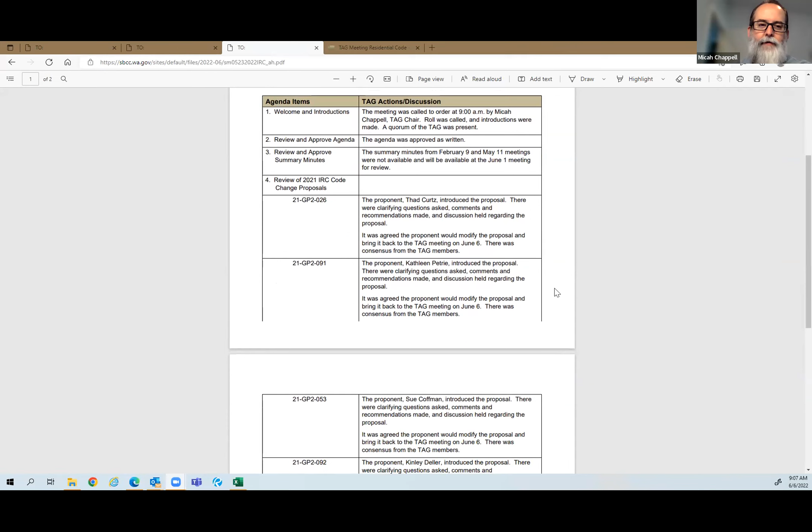You know, if we could get the minutes before the meeting, it would be great. I'm generally uncomfortable approving something that I haven't read. We are really struggling with the minutes because we have meetings back to back, a few meetings per day, so be patient with us. Understood, it's just, maybe we catch them up the next meeting, or I don't know if we actually have a next meeting, but I understand. That makes sense. Maybe we could also look at sending out the recordings sooner, although they're not summary minutes, but at least it would have the information available. We are able to post the recordings faster, but the minutes take time because it's only Annette, and she can't keep up with all these meetings that are in a row.

Understandable, all right, so noted, thank you for the discussion, Annie. Will these minutes actually be posted online soon? Yes, once they're approved, I posted them this morning. I just got them finished, I apologize for that, so they are on today's meeting. If you go to our website and look, and then once they're approved, I will have them posted for the meetings they pertain to. Thank you.

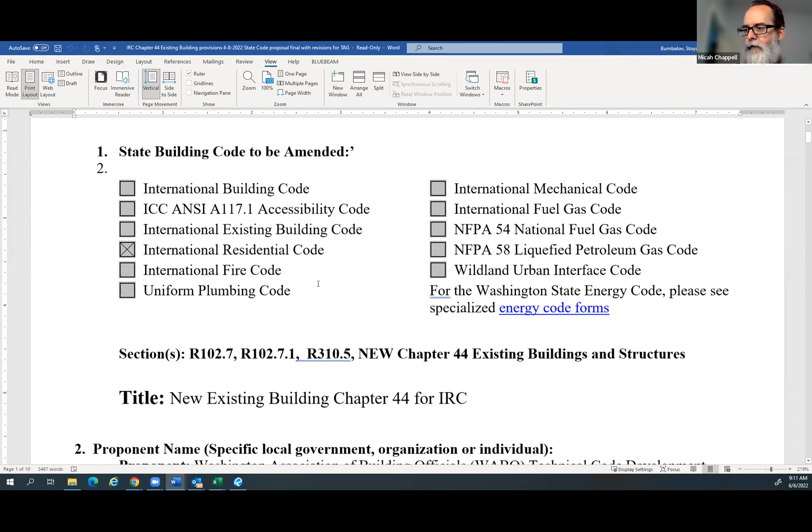Here is the proposal. Stoyan, is this the one that I emailed you this morning? This is the one that you emailed me this morning. Yes, okay great.

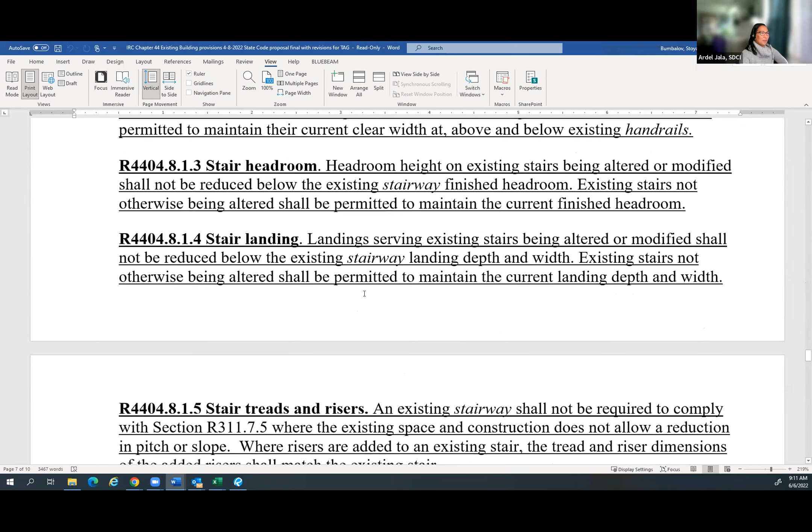Do you have the modified areas highlighted or track changes, something? I did not. I tried to get a clean version to you, but I have them highlighted on my screen. I don't know if it's okay for me to do a screen share. Okay, yeah, I think that Ardel could probably easily do that.

We did discuss most of the proposal from last week, and so this is really just cleanup of a few items, just some clarifications. So Ardel has a version that she was able to get done yesterday. Thanks for swapping this out.

Hi again, my name's Ardel Jala with SDCI, and Sue's presented the overall proposal previously. As I go through these changes, feel free to stop me and let me know when you want to dig into a section further. They are primarily editorial.

There are a couple of technical changes, but as you may know, these are currently also being discussed for the 2024 national code change proposals. And so what we've done is taken some of the committee action hearing results and incorporated them into our state proposal where we felt it was appropriate.

And so that's what you'll see here today is one of the fairly significant structural proposals that got into the 2024 code change proposal that WABO also has a version of and will be taking to national at the public comment hearings. So here we have, can everybody see this screen?

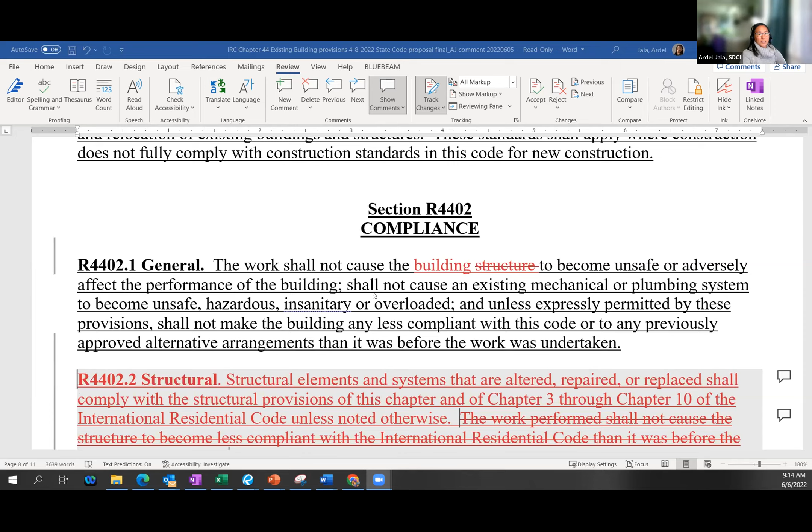As we keep going further, slight change to reference a building instead of a structure, as that has become consistent language throughout IRC. This is the structural changes that were approved in RB 297 at the committee action hearings. And this is more specific language within existing buildings that will carry throughout all of the sections that are scoped in chapter 44. Compliance section is the first one.

And so this is where we talk about more general requirements. And it says to comply with the provisions of this chapter and of chapter 3 through 10 of the IRC unless noted otherwise. So again, chapter 44 is the break to full code compliance.

This is minimum design loads. This clarifies that the structure shall be designed for the loads applicable at the time the building was constructed, and then within each scoping—alterations, repairs, or additions—that gets further clarified. So that's the unless noted otherwise. And again, a reference back to 102.7.1, which when you uncover work, structural components that are unsafe shall be repaired.

This next one is one that might want discussion. 4402.2.3 is unreinforced masonry parapet bracing, which is language out of the model code change proposal that requires unreinforced masonry buildings in the IRC that are in seismic design category D or E to get their parapets braced and wall anchors installed at the roof line whenever a re-roofing permit is issued. How that would be enforced across jurisdictions may vary, because re-roofing permit requirements do vary across jurisdictions. It also requires that parapet bracing and wall anchors be of an approved design, which could reference both an engineered design or a prescriptive design, depending on the rules in place at a jurisdiction.

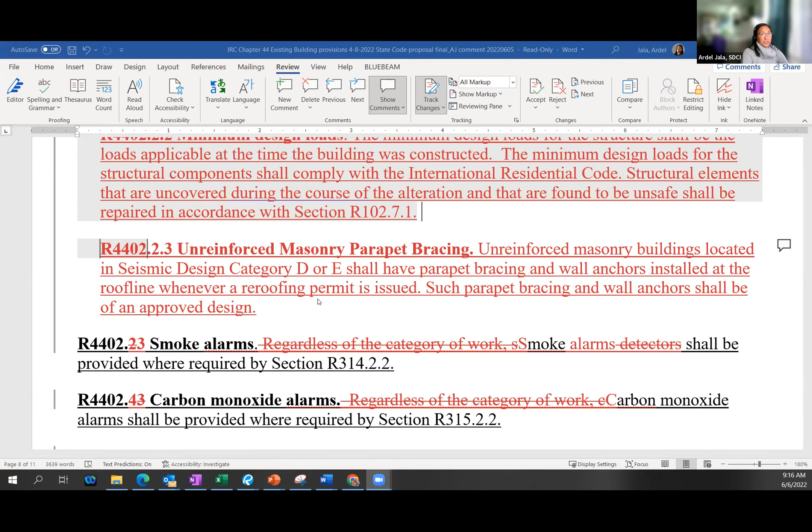Going further through, just some cleanup of language on regardless of the category work. That's unnecessary language, so we took that out of these two sections here. There's some renumbering going on because of the addition of the structural section.

4402.7 is features exceeding code requirements, and you can always go above and beyond code, so this just seemed like an unnecessary section. So we've stricken that.

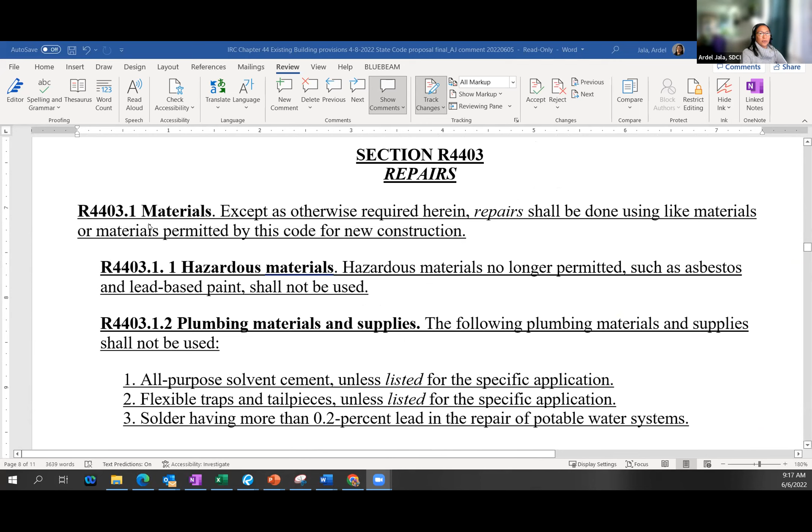Again, a reference to structural was added to each of these scoping sections. So right now, if you're in 4403, the scoping goes in order of repairs, and so you'll see that first here in repairs. The next section is alterations.

Again, this particular change is an editorial comment. Alterations shall not cause the existing building to become less compliant than it was prior to this work being completed. And then this language is stricken because it's already part of R102.7.1. So there's no need to duplicate it here, because if you duplicate it here, then you should duplicate it in all the sections.

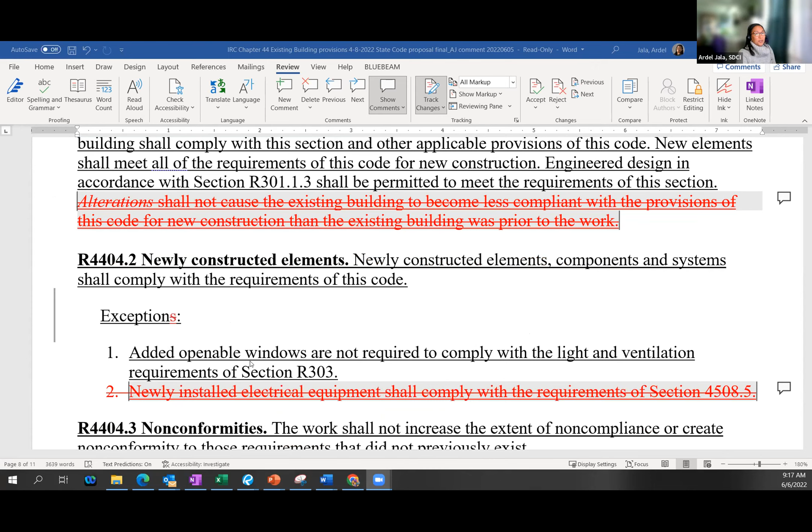And so it didn't make sense under one of the subsections. Newly constructed elements shall meet new code. Again, we are in the alteration section, so if you're building new, meet new. And the exceptions are—this was in the version last time.

What we've stricken is: newly installed electrical equipment shall comply with the requirements of section 4508.5. And Sue, correct me here, was this just a leftover from a reference in your version of it? Yeah, and you're right, we don't need to restate this. We already say in the charging that new means new, so it doesn't need to be restated. Thanks.

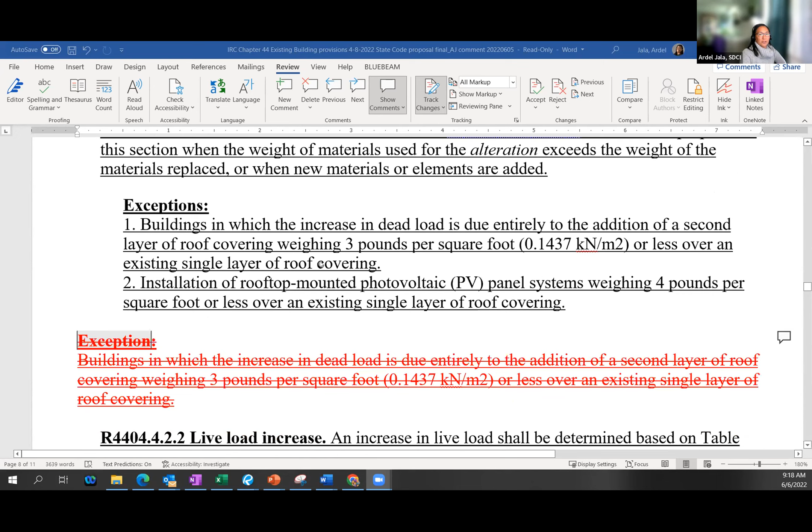4404.4, again we're in the alteration section, so we're repeating the structural reference language here. These sections that follow, there's no change here from what the version you last saw. This is a cleanup—here we had exceptions 1 and 2. This was a repeat of language of exception 1, so we didn't need that section. This is just cleanup here.

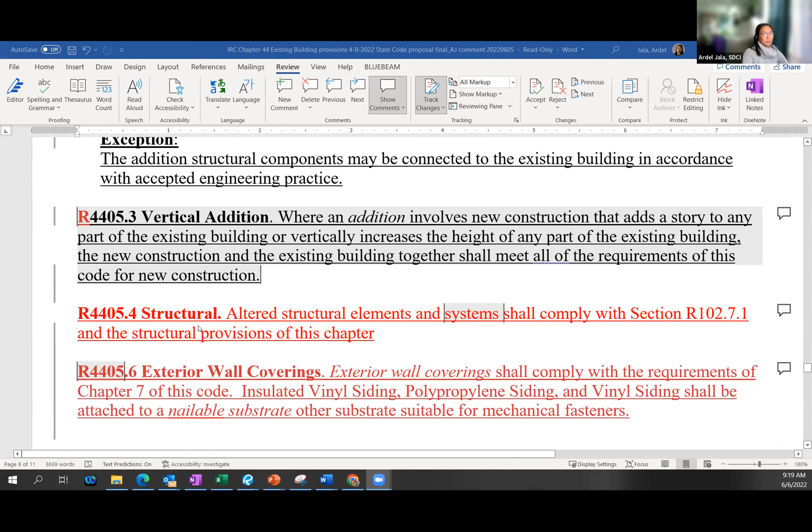As we continue going through, there's no changes to the version you last saw, until we get into the addition section, which again we add the reference for structural. This is a newer one, 4405.6. This is also something that was approved at the committee action hearings, and so again, in an effort to align with what's being approved at the national level, we've pulled this section into the additions, and it's a reference to exterior wall coverings per chapter 7.

Sorry, there is a slight area, this needs to say 'or.' So that's an add versus the version that you've had, and I'll clean that up and send that back to you, Stoyan. It's: insulated vinyl siding, polypropylene siding, and vinyl siding shall be attached to a nailable substrate or other substrate suitable for mechanical fasteners. And what is a nailable substrate? That is a term that got pulled into the 21 code, so that is a defined term.

Relocations. This is a sentence that compliance with the requirements of this chapter is required if the moved buildings or structures undergo substantial alterations as defined in R107.9.1—that is a reference that doesn't exist in the state code, and so we've stricken it here. And it just goes back to the model code language, which is that if you relocate a building within the jurisdiction and you're not changing the use or classification, then you just get to move it. But the foundation needs to comply with the requirements of new construction.

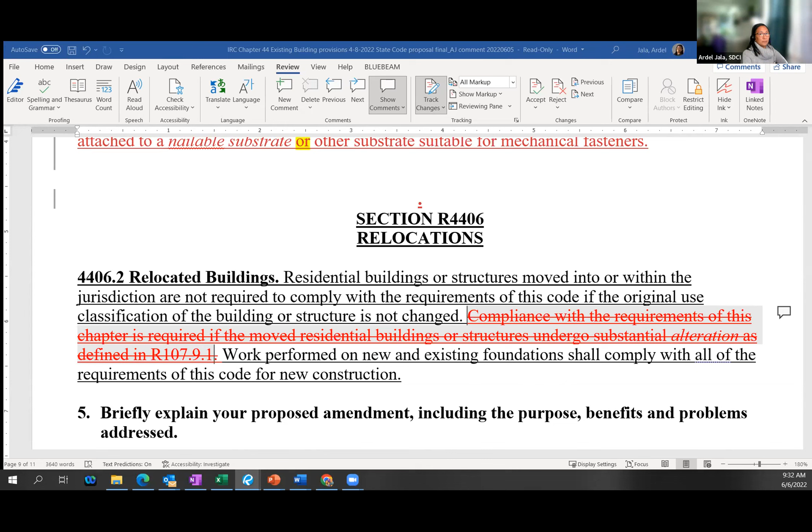Any additional questions or comments? Okay. So today we will need to take some votes on the tag recommendation for these. Am I correct in saying that, Stoyan, before I jump the gun on anything? Yes, sir. Okay, fabulous.

So as you've been shown and discussed, the 053 proposal for a new chapter 44 has been revised, and I want to get a motion from the tag on whether or not we would recommend moving this forward to the BFP committee as an approved or disapproved proposal. So I will open the floor to tag members for a motion, please.

It's Damon Doyle, I move approval. Okay, we have a motion. Do we have a second? I'll second it, and I think we just need to clarify revised and amended. Okay, thank you for that clarification.

Stoyan, how do you want that motion to be noted, that we are approving for recommendation the revised proposal? Do you see the spreadsheet? Yes. Okay, so here is 53. We have the initial proposal, we have the revision, and I need to update the revision because I wasn't aware of the new revision. So I will replace this, and here we will have the recommendation for the council and the BFP committee: approve as modified.

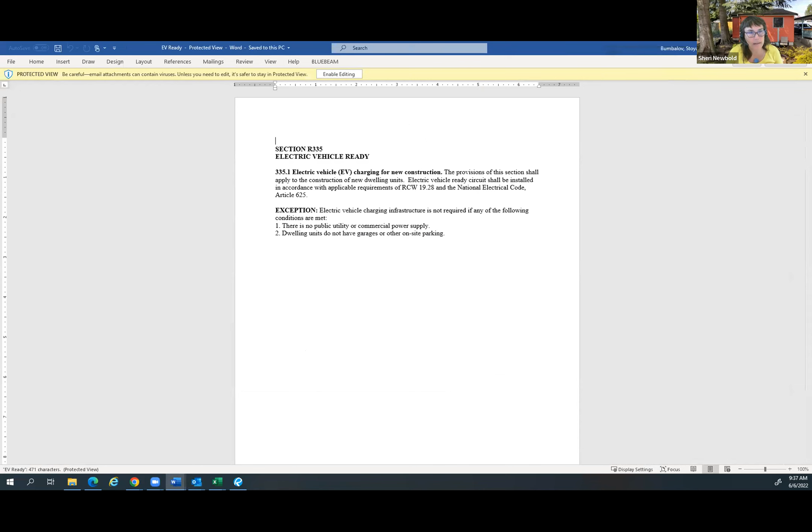And I've added a couple of sections into it to clarify some of the questions that were asked. One of the things that I've shifted in here is there was a request for this to really have seismic provisions under IBC, and so I've clarified that in the R301.

Sorry, point. Oh, that's okay. Where do you want— just me going down to this very next one, you're right there. I've just clarified that this would refer to seismic provisions in the IBC. I think there was a concern about that instead of it being prescriptive last time.

And then I think the very next thing to talk about is that one of the things I think that's important about this proposal is that it's proposing that we have these smaller scale multifamily units that then have a prescriptive way of treating fire resistance. They have a prescriptive way of protecting the exit and establishing what the width of the exit is and how many exit discharges, et cetera. And so those are some of the questions that came up last time.

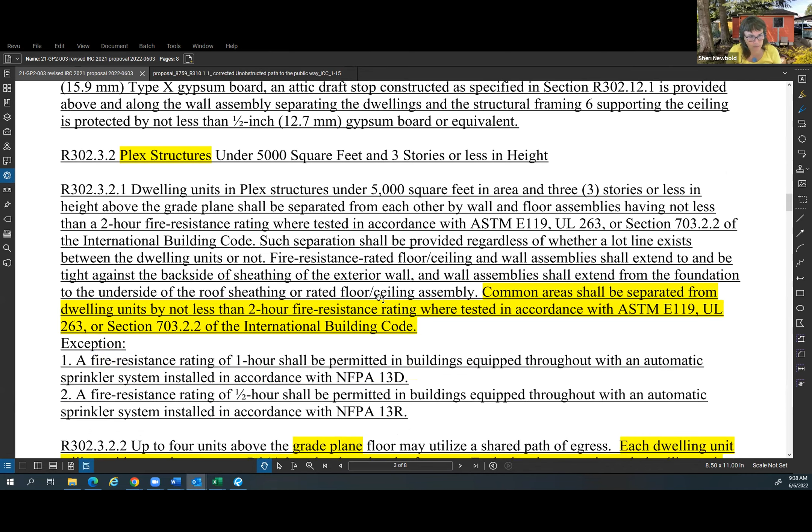And then what I'm proposing, if you scroll down just a little bit more, Stoyan, under the R302.3 — and I realized that at some point in time this would all get renumbered and utilize the actual state code instead of the model code — but essentially that's what I've put here, is I've clarified grade plane, and

separating any kind of common area or path of egress with a 2-hour resistance. I've also specified that each dwelling unit would have an exit access to the shared path of egress, and that each sleeping room within the dwelling unit would have an emergency escape and rescue opening per 310. And that the path of egress would be protected by a 2-hour fire resistance rating, and specified a prescriptive width for the path of egress if they're in this under 5,000 square foot building. It would have a prescriptive width of 42 inches minimum, and otherwise meet R311, and then have 2 exit discharges to the public way.

And then I've reduced potentially that prescriptive width for the path of egress if there's a sprinkler system. So that's what I've done for the up to 5,000, and I've done something similar in scale for the up to 8,000 structure.

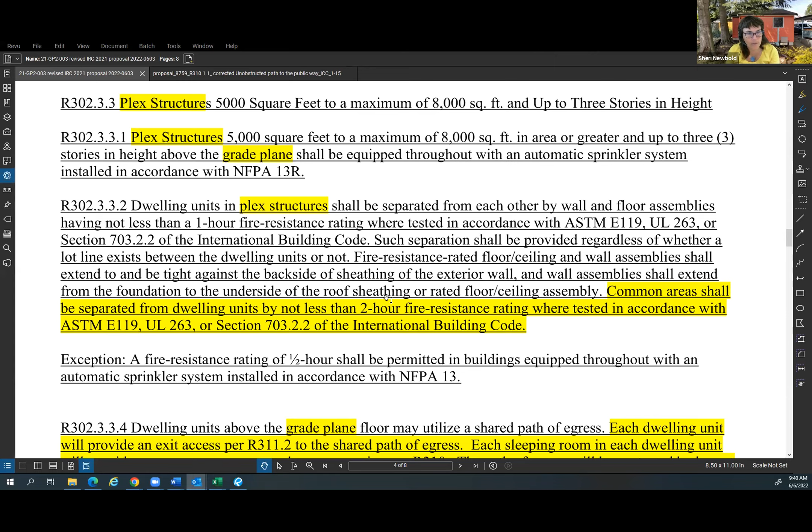The other thing that was brought up last time was interconnection for the smoke alarms. Because all of this is duplicating, we could scroll down to R314, where I've called for interconnection of the required smoke alarms, so that any actuation would affect smoke alarms either in a path of egress or common area and all the dwelling units. So anything triggered in one section of the building would trigger it in all parts of the building.

And then last time there was a concern about accessibility, and R320 currently refers certain projects being permitted under IRC to the building code for accessibility. So I've essentially changed that here to 3 or more dwelling units instead of 4 or more dwelling units, in order to accommodate accessibility. And of course, fair housing would be triggered at any rate as well.

And so that's really the sum of the changes that I've made.

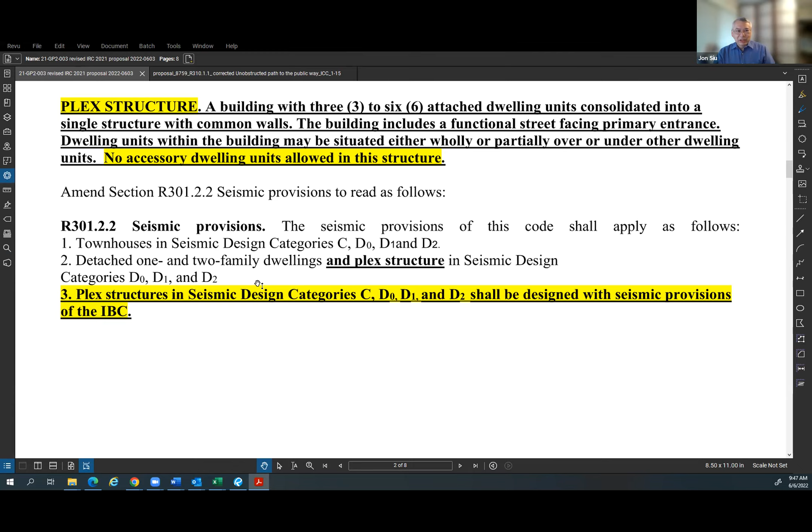I really think that's a really bad idea when you don't have control of your own space. Someone's burned toast is gonna get everybody, so I think that's kind of a problem. But also I would ask the question I don't know the answer to: whether that would violate the listings where interconnected smokes are allowed in multiple dwelling units, or in common spaces. They may not fit the listing.

So that one I don't know. But the other thing I'll say is I've talked to some people from the Midwest, in Shelby County in particular, and they weren't too happy with that when it went through. What I last heard, and maybe something you need to look at, is the state fire marshal put it on hold because they were not involved in the process, and they were surprised when it went through. So I believe it's being held at the state level right now. I haven't heard what's happened since then.

So I guess those are my comments on this. I really think this should be in the IBC, not in the IRC. So that's my opinion.

Thanks, Jon. Other folks like to talk on this or discuss this proposal? Ken, go ahead.

I was really thinking other people were going to talk, so I was trying to be nice and just wait. So Sheri, I got a question for you. When do you envision these structures to have attached garages?

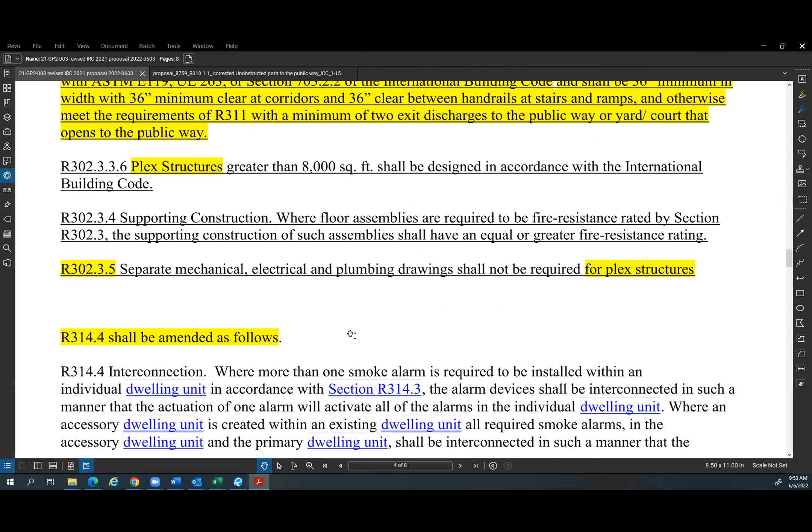Okay, great. The other question I had is in 301.2.2, where it talks about the seismic provisions — we need to include seismic design category E as well. Okay.

I'm a little reticent to having regular references to the IBC, where we talk about going to the IBC to find out what your fire ratings look like.

Which portion are you referring to? 302.3.2.1 - the new language you added there. You just say go see the IBC for that information. I think the goal with the IRC was that it be a standalone document, so you could get what you needed without constantly running back to the IBC.

Can I jump in here? Some of that language, although underlined, is current language in the IRC, Annie - brought over without change, just maybe renumbered. However, there are several references in 302 that send you back to the testing requirements in the IBC, and it also sends you to the IBC currently in R320 for accessibility.

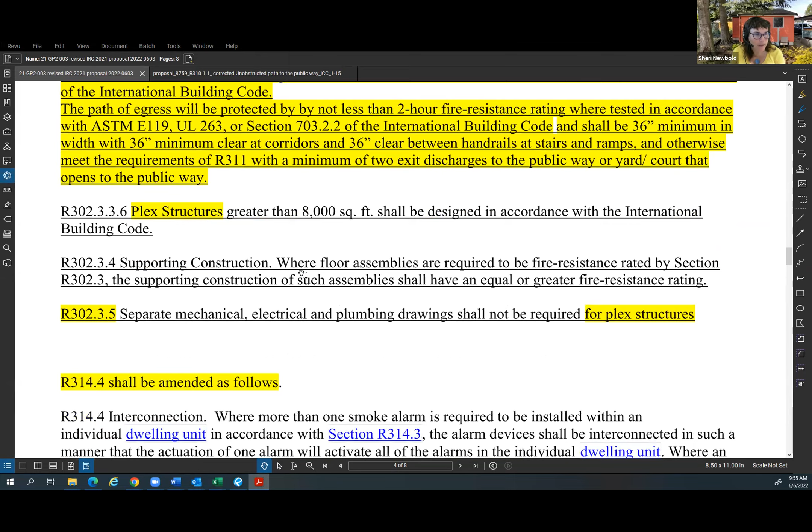Do the ADA requirements start at 4 units or 3 units? I noticed you shoved it from 4 to 3. From a fair housing and ADA requirement, it was 4 or more. It is 4 or more, but what I was suggesting is that since this proposal is for 3 to 6 units, it would start at 3 essentially. But I think consistency with the federal law is probably the best approach.

I appreciate the fact that you put separation between the common areas and the units. I was having real heartburn over those omissions in the first go round. That's everything for me, thanks.

Thank you, Annie. All right, taking them in order that I see the hands up, and that would be John. Yeah, so Annie and Sheri, about the seismic design category E.

I want to be careful with that one. I don't know how you want to do this, but the code already requires that anything in seismic design category E has to go to the IBC, period. So that's probably why it's not addressed in there. This came up in another proposal, and Andy, you'd asked about that before. You don't want to start adding SDCE into all of these because those are supposed to go directly to the IBC - look at 301.2.2 in the base code. Just wanted to throw that in.

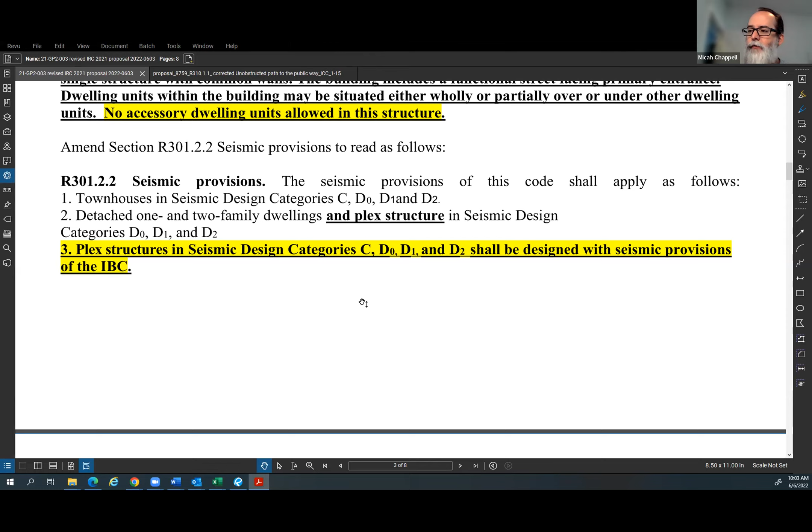So I'll jump in and share a few of my concerns. I still have concerns with the definition. It's talking about, I don't know, it's just going way beyond what I think it should. You do have in there mentioning the building includes a functional street facing primary entrance. Is that an entrance to the corridor or an entrance to units? I'm just not sure what you're meaning there. And speaking of corridors, that is a term that is not used in the IRC. However, you are using it similar to the IBC, but you're not carrying over the definition from the IBC. So I do have some concerns there. How are you using corridors?

I do understand what you're trying to get at with the common path of egress, but again, it's not called common path of egress here. You're calling it a shared path of egress, which also, how is that defined and what would that look like? You're indicating that these dwelling units need to be separated from the common areas by 2 hours. Would that mean that the path of egress has to have a 2-hour separation from each unit as well? I'm not real clear on that. I think that's what you were going for, but that's not explicit in here, in my opinion, of course.

And then I'm just going to kind of parrot—I won't parrot, I'll do the Me Too wave. What we mean by a Me Too wave, for those that don't attend the national hearing, instead of repeating testimony from a bunch of folks in the room, they just give a big, nice, happy wave. As a Me Too, I say the same thing. So that's what the Me Too wave is for there, so if you hear that term, that's what that means. So I'll give a similar Me Too wave on several other items in here. And then I'll still allow for additional discussion if there's anyone else, and if not, I will open the floor.

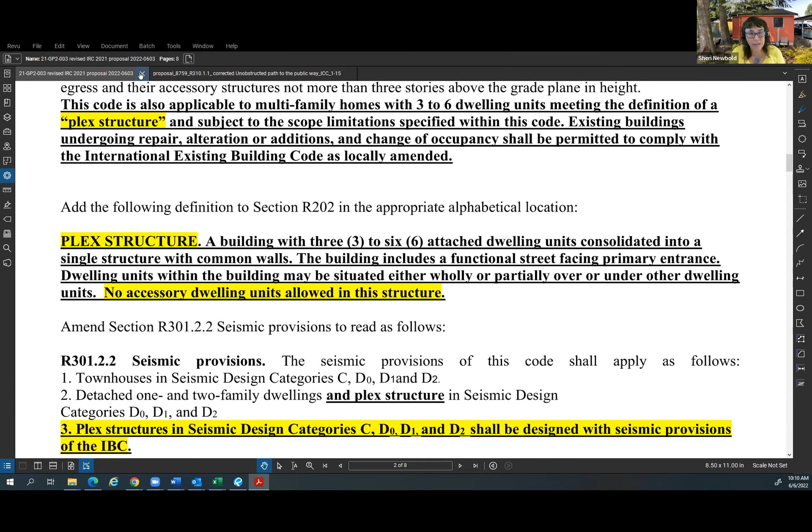And it sounded like Thad and Ardell would be open to it as well, from what I heard them say. So okay, well, I really appreciate everybody's time and energy. So thank you. Thank you, Sheri, we appreciate your time and effort on this.

All right, moving on. Is there anyone else on the call that needed to have a proposal moved up a little earlier? In case they've got something else going on, I want to make sure I provide that opportunity to everyone that is on.

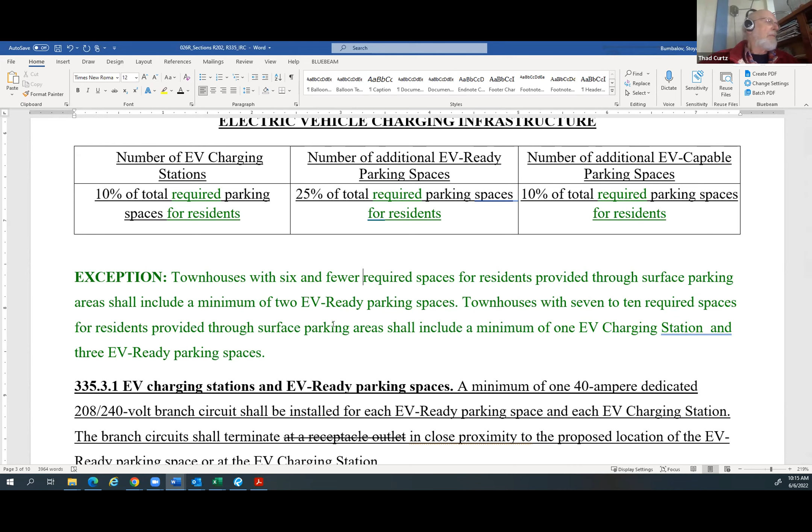So, that's it really. I mean, my basic goals are pretty simple. If new residences have private parking, we ought to be making it easier for the people living in them to add charging for an EV when they get one. The requirements for townhouses with surface parking ought to parallel the ones that the council's already moving forward for apartments built under the IBC. I don't know whether you'd like me to walk through all of the details in the way that Ardell did, or whether you're clear enough about the whole thing so that we can just talk about particular items. But whichever you'd like to do is okay with me.

You're actually the proponent, so if you wanted to go through each change and explain that, that would be fine. But if the tag feels that you've covered that and they've had a chance to review it and see your items in green, then we can just discuss those items as tagged. So I just don't know how much time people have had to look at it in detail, and whether it would be helpful for us to go through it a screen at a time, or whether people just have a certain number of questions they want to ask.

All right, hearing nothing, we may as well just kind of go through it by steps, I guess, just in case there's anything that people might miss otherwise. So Diane, if you could go back to the top, let's see.

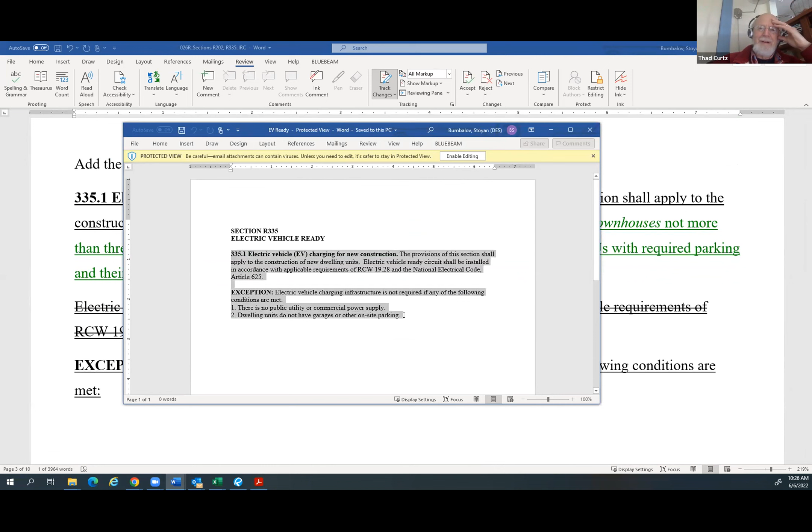Can we go back and look at it again then? I thought our previous conversation was...

Damon, maybe I'm not reading your proposal as I should be, so help me with this. What I'm seeing is the charging paragraph says it'll apply to the construction of all new dwelling units, and an EV-ready circuit shall be installed. That is correct, and so that's it. I guess I'm not seeing a link between the number of EV-ready circuits and the number of dwelling units in that particular project.

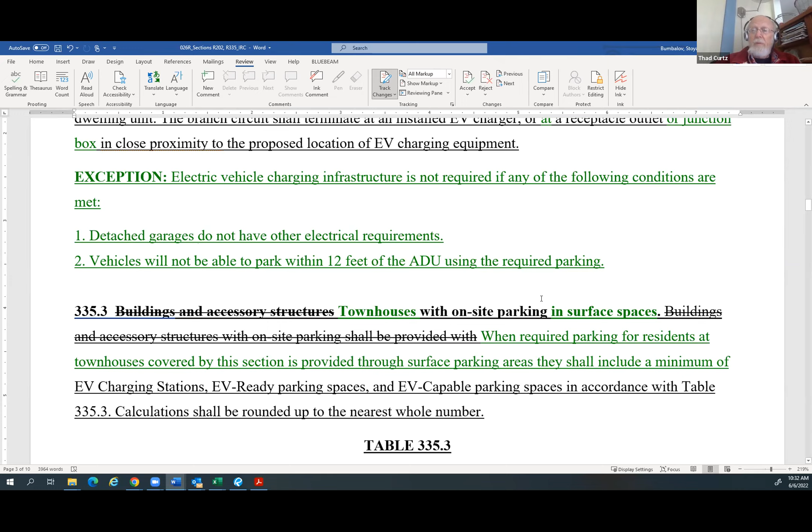The rest of it is about trying to provide for charging in townhouses that do not have garages. And it basically tries to do this in a way that's consistent with the requirements for apartments, more or less like that built under the IBC rather than under the IRC.

It's got the same table that the IBC does, except that if you use the IBC's table for buildings like this that have got a small number of spaces, it seemed to me as if you ended up with more requirements for spaces than really was necessary.

So I've put in something which just specifies numbers for townhouses with 10 spaces or less, rather than applying the table to them.

If you apply the table to some apartment that's got 5 townhouse apartments in it, you end up having to have 4 spaces that have got infrastructure because you're rounding up. So there's 1 EV charging station, there are 2 EV ready spaces, there's another EV capable space. And that seemed like a lot to me for a 5 apartment townhouse. So I've tried to do something that will make it easier to think about that and not require quite as much in that exception.

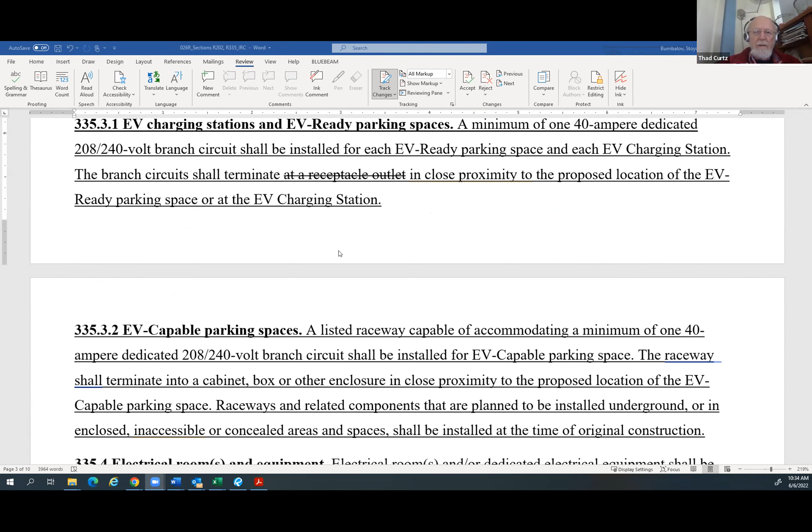Again, the conversation last time made me think that this thing about 335.4 was unnecessary. I've added a little illustrative comment to the exception about load management systems to try to make it clearer about exactly what we're talking about there. That you could put in a circuit with a 60 amp breaker, and it would deliver 48 amps of continuous load. So you could serve 3 spaces with a minimum 16 amp requirement from one circuit like that if you had sharing software. And again, people seem to agree that the accessibility issues were already covered by other places in the IRC, so I took that out.

That's the tour. All right, thank you, Thad.

Okay, with that, I am going to ask Dorian to scroll back up to the beginning, or Annette, whoever's controlling that, up to the beginning of the proposal, and we're going to open it to the floor for discussion on the proposed changes or the proposal overall.

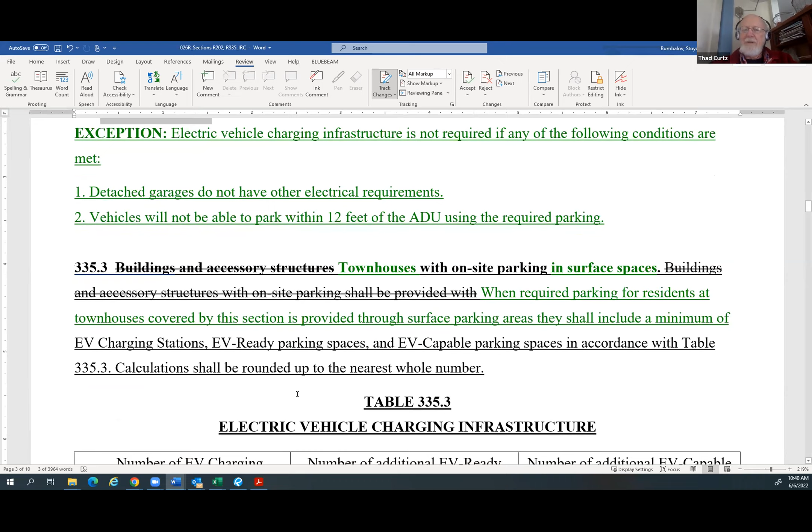Maybe, I don't know whether it's appropriate. Maybe we could proceed by stages, Micah. If we entertained a proposal to cut the ADU language and replace it with an exemption for ADUs, that would be one step. We could entertain a proposal to remove my particular exemption for townhouses with no garages and 10 spaces or less, and replace it with the exemption that's currently in the IBC, just exempting anything that's got 10 spaces or less from the requirement there. And then we could entertain a proposal for just basically doing what Damon would like to do, striking the rest of it, and see what people think about the different pieces of it.

Okay, Thad, that's a good suggestion. However, based on our time and schedule, I don't believe we're going to have enough time to sit here and rebuild the proposal to the entire tag's liking. I know there are a lot of holes in it that folks have concern with. I'll share some of mine. Again, you have done a phenomenal amount of work in a short amount of time to make some modifications. However, I still don't believe it's enough. I do believe if we start at the definitions, these are similar definitions to the proposal that was before for the IBC. However, I believe we got rid of electric vehicle as a definition, and then electric vehicle charging station, since it is still an electric vehicle supply equipment. They were very similar, so we cut down on some of the definitions.

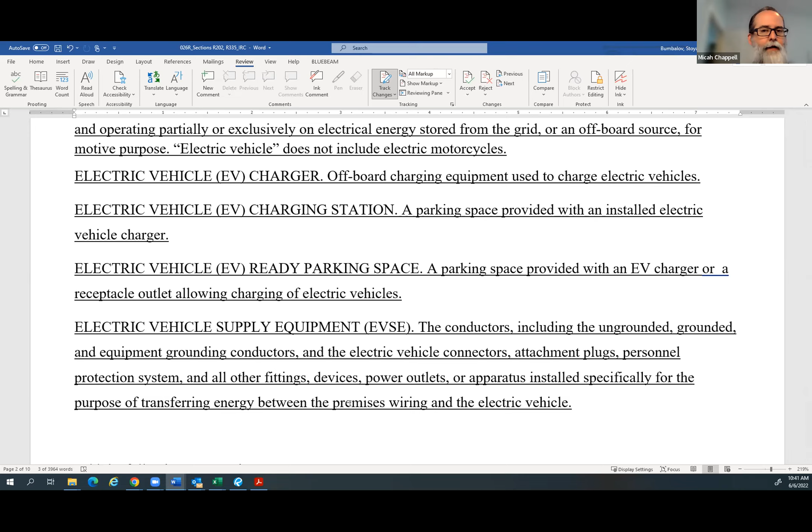Then, getting into the ADU requirement, I still don't believe ADUs are necessary here. Accessory dwelling unit is not a term that's used in the code except for one place, talking about an accessory dwelling unit being placed within a two-family dwelling unit, or within a dwelling unit doesn't make it a two-family dwelling unit. It's not a defined term, it's a dwelling unit. I do agree with Damon there that if you want these for each dwelling unit, we need to just say for each dwelling unit. Moving further down, we get into a lot of electrical code language, which should not be in this section. We do have the residential code or electrical code, whether we point to the state language or whether you modify this and further down in the IRC, then that would be a path to take.

Then again, I will parrot some of Ron's concerns. It's not clear where these are supposed to go, even if you're talking about garages, detached garages, electrical meters, electrical services, electrical requirements. My understanding is that a detached garage, if there's electrical, it still needs to have some type of branch circuit supplied there. I'm not an electrician anymore, but I think there's just a lot of issues with this, and I agree with Ron that I don't think this is ready to move forward. I just think there's a lot that can be done. If you do want to work on some modifications with Damon or some of the other tag members or members from the public, if this is disapproved, you could do that between now and when it comes up at the BFP committee and further on in the process. But I have a lot of concerns with this, just as the way it's written and proposed currently. Even with the changes you brought in, I still think there's so many questions that aren't answered in this code change. So that's my 2 cents.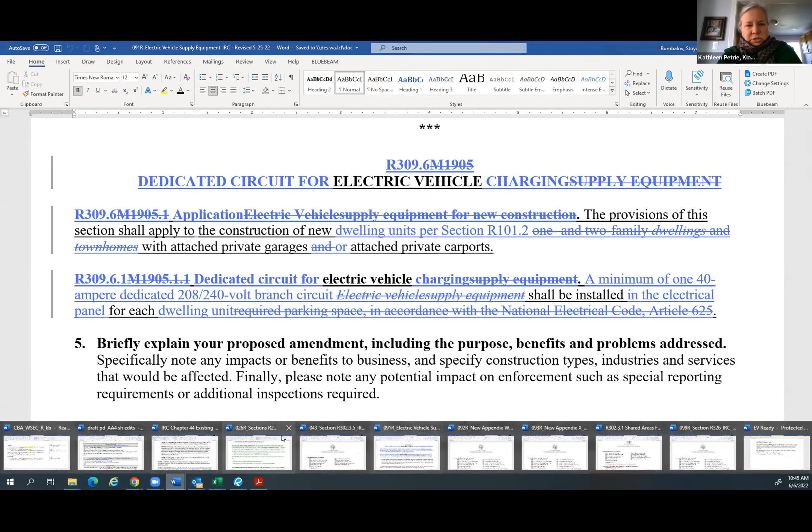Modified the section title to reflect that the requirement now is only to add a dedicated circuit. We've deleted the EVSE definition because it's unnecessary, and tied the requirement to each dwelling unit versus each required parking space. It clarifies that the section applies to the construction of all new dwelling units under the scope of the IRC and their attached private garages and carports, versus the confusion around whether it would apply to 1 and 2 family dwellings and attached private garages and carports of townhomes.

It deletes the reference to the electrical code since the two codes aren't correlated, and the EVSE definition has been deleted since it seems unnecessary. The one thing I failed to add, and my apologies for not documenting it, was the exception. I know two exception items have been proposed, and I'm proposing that only one actually be added: an exception that electric vehicle charging infrastructure would not be required if there is no public utility or commercial power supply. I don't think proposed item number 2, dwelling units without garages or other on-site parking, is necessary given the scope of the provision, but if you felt it is, it could be added as well.

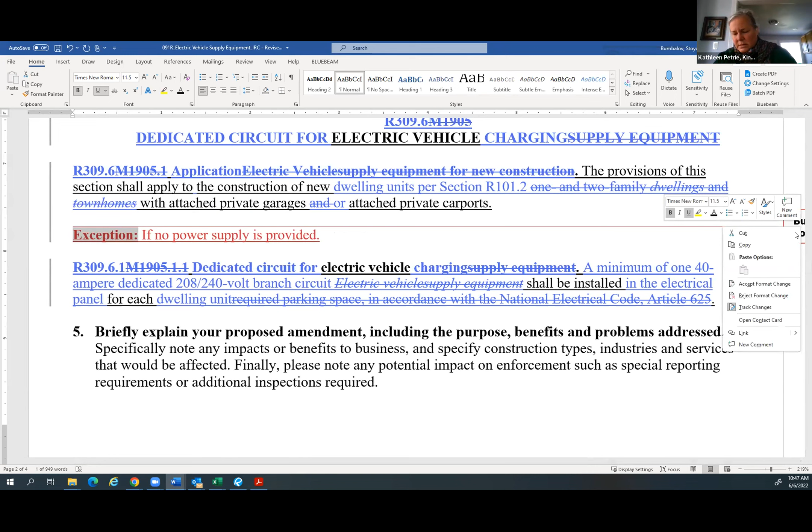And thank you, Micah, or whomever. That's not me, I have terrible typing. Well, thank you to somebody. Electric vehicle charging infrastructure is not required if... I will modify the exception, I'll make it the same. Oh, thank you, Stoyan. It appears in the building code. You're proposing the same exception, right? Yes, please. Okay.

All right. Thank you, Kathleen. We have a hand up real quick from Damon, and then we'll open the floor for discussion. Go ahead, Damon. I'd like to go ahead and move approval of this provision and then also offer an amendment. Okay, Damon, I'm going to ask if we hold off on your motion, that way we make sure we have allowance for the members of the public to discuss before we move on to the TAG member discussion, if that's okay. That's fine, thank you.

Damon, can we hear your motion or your proposal revision? Yeah, can we hear your exception change there, Damon? Yeah, I was just going to simply ask if Stoyan would put in the 2 exceptions that I had listed in my brief from the last meeting.

So what you're proposing here, Damon, would be to bring over the exceptions as they are shown in the IBC proposal under consideration. I believe that's correct. Exception 2 is not really needed because the scoping clarifies that the provisions are for units with garages. You are correct, yep, so you could strike 2. Okay, so there, I just simplified your language as far as public utility or commercial power. Okay.

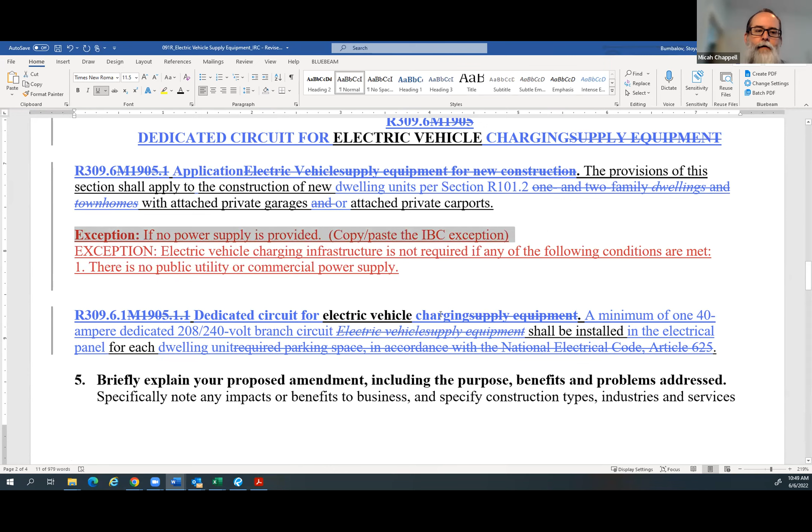Jen: Hi, just a question. So if there is a new ADU being created, a new dwelling unit within an existing home, and the home has a garage already, would this apply in that case?

Technically, no, but if you wanted to add that provision, that would be fine. Yeah, I just think it's a little unclear because it is construction of a new dwelling unit, but it doesn't have its own dedicated carport or garage, so I can see where that would be open to interpretation. Okay, all right, thank you.

Well, if I can jump in here, the ADU, as Micah mentioned, as a term, it's a dwelling unit. And if there is no garage for this dwelling unit, then it's outside the scoping of this proposal. So do we need to exempt something that is not covered anyway? A single family home that already has a 2-car garage and then creates another dwelling unit within that home, does it not have a garage? Because the use of that garage may not be clear. Is it if the unit opens directly to the garage or not?

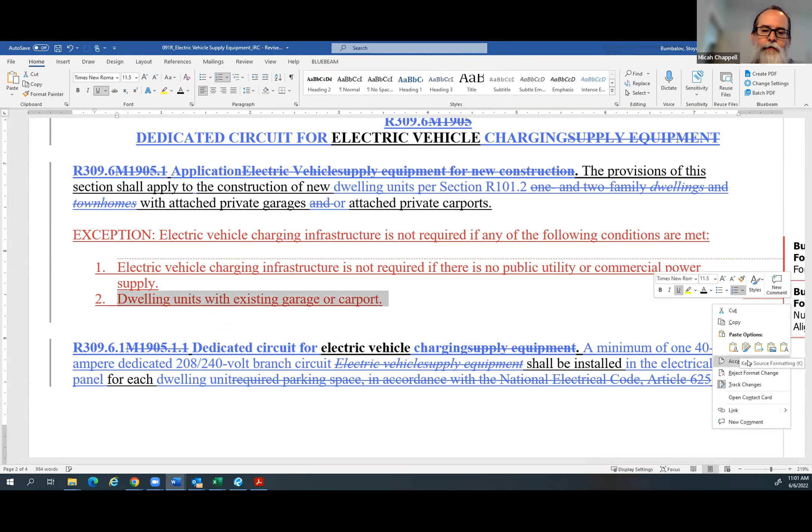It could, I guess, for me - I do understand the concern. However, Kathleen, correct me if I'm wrong, isn't the intent to provide this infrastructure for all new dwelling units? Honestly, whether or not the private garage or carport is used by the existing dwelling unit or the new dwelling unit, it seems like the infrastructure should be provided. That's my 2 cents - maybe that's going a step too far.

If you are doing a conversion or an addition to an existing dwelling, you're clearly digging into the panel, right? So you're going to be opening up the electrical anyways. So to add the circuit is not the worst thing in the world. Right.

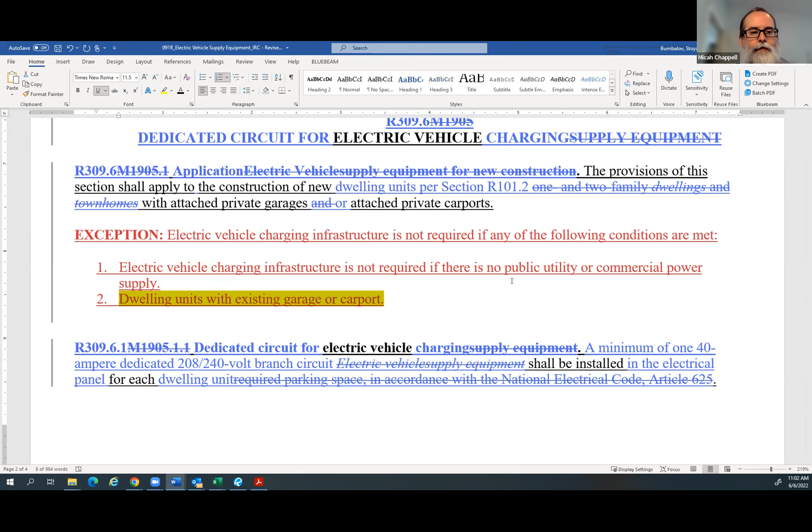And then I do have a question on 309.6.1. Just on the terminology - when we look at some of the definitions in the electrical code, or even the residential portion of the electrical information in the residential code, I'm not sure where you want this circuit to be. It says you shall provide a minimum of this dedicated 40 amp branch circuit, and it shall be installed in the electrical panel. So if I read that, I would be confused as to whether I have to provide a branch circuit going somewhere, or if I just have to provide a 40 amp overcurrent device in the existing panel or new panel.

Not having the electrical background, this was the suggested language that I add. Micah, I know that you do have some background in this - what do you feel would be appropriate? And Damon, you as well.

Damon's probably more up to date on this, but branch circuit is one thing and the service panel is another. What this indicates is that you're installing a branch circuit in the service panel - that's how that reads to me. Gotcha, yeah, and I read it the same way.

You could say branch circuit terminating in a junction box adjacent to the panel - now it's accessible. Because otherwise I could just put a 40 amp breaker in and be done with it. Don't you want it somewhere near the parking space though? Yes - I'm imagining that most panels are already in garages, but that's not the case every time.

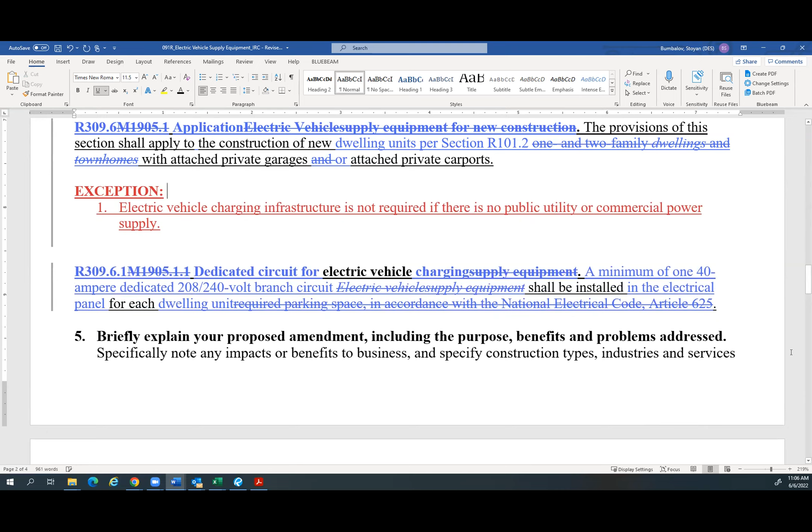But for exception 1, we do not need to repeat that electric vehicle charging infrastructure is not required, because we're already saying that. So I would recommend not duplicating that, and then we don't need exception number 2, I don't think. So if we don't need exception 2, I will delete the charging language and we'll have this - oops, sorry. Is that better? Looks good to me. Okay.

You could actually say electric vehicle infrastructure where there is no public utility or commercial power. The exceptions already are not required - electric vehicle infrastructure, where there is no...

Like that? I think that reads correct. Well, it reads a bit odd for me, but English is my second language, so I'll pass it. John, go ahead, you can correct me. I agree with you, Stoyan. And English is my first language.

If you're going to shorten it that much, you get rid of the electrical vehicle charging infrastructure language and start with 'where.' Personally, I prefer full, complete sentences as the exception, but you have two choices: leave it as a complete sentence, which is my preference, or delete from the first word all the way through 'if' and then put 'where.' That's the more normal style that's growing in the code. So you'd delete everything up through 'if.'

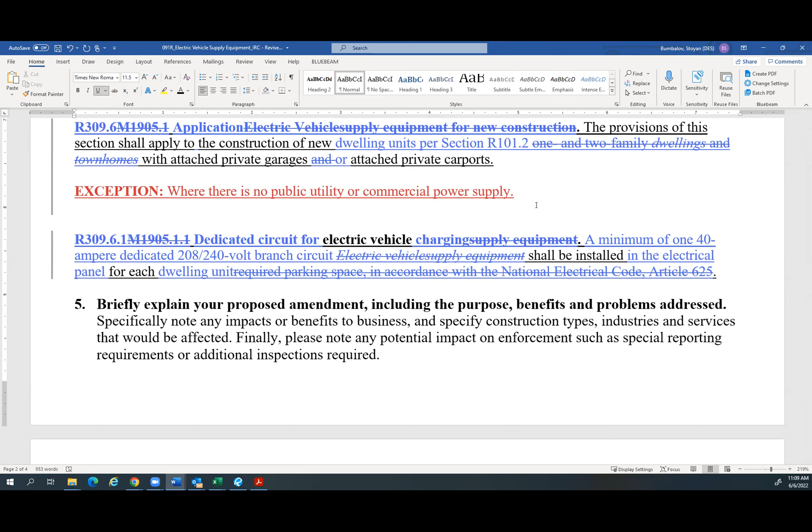Okay. Stoyan, we really need to have a chat function in this Zoom so I can post language. There is language about branch circuit termination in the IBC proposal that I think would be really clear and provide the information needed in 309.6.1. Is there a way you can pull that language up, or I guess I can email you what's in that proposal. It would clean up the issue I'm having with that language about the branch circuit in the electrical panel.

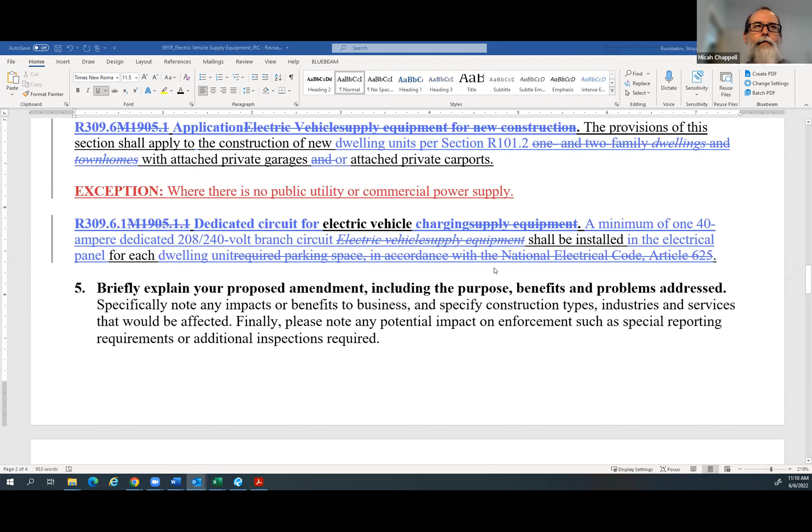I think that also clears up Damon's concern about if it's not going to go to charging equipment, then it shall terminate at a receptacle or junction box. Oh, I think I sent you the whole thing, you only need the one sentence, not the two. Screwed up there, Stoyan, sorry. You can eliminate the last sentence, we're not doing conduit and spare cable. Does that solve the issue? I know it solved it for me. Yep, I like that.

Should we specify how close it is to the parking or where it is, since it's been brought up a couple times? Or do we just leave that to the inspector's interpretation? Sometimes leaving things vague is more helpful because it allows a case-by-case basis, sometimes it's not. I think the electrical code will address some of this because it allows, I think, up to 25 feet length of cable for a wired-in-place charger, and I think the same requirement applies to portable chargers, but that's a personal opinion.

All right, thanks Stoyan, hopefully that answers the question. John, you had your hand up. Yeah, I think Stoyan addressed it. If you wanted to put some language in, you could use instead of 'close proximity,' which was in the previous proposal, language similar to smoke alarms, which would be 'in the immediate vicinity of.' If you want to throw something in there, I'm not arguing one way or the other, but that would be a possibility.

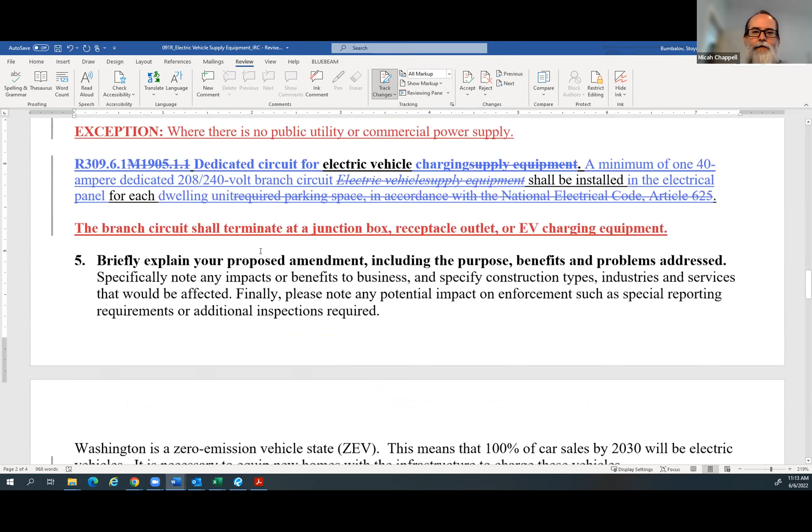Thanks, John, that's a possibility. Jen, go ahead, you have your hand up. We have the acronym EV, but I don't think we've actually spelled it out anywhere else, so can we just say electric vehicle instead of EV? Absolutely. Go back down, Stoyan. I was checking the definitions, I think we get rid of all of them, so you can just spell out electric vehicle charging equipment in that last portion. Is that what you're getting, Jen? Yes, okay, thank you.

I do like the open part of how far it can be. I think it comes down to the charging equipment, since some of us have longer cabling, some shorter. I think we do need to leave that open, that would be my preference.

Okay, we do have some additional language changed and modified here. Does the proponent have any thoughts or additional input to these modifications if we look for a motion? These look great, and I agree we should keep the proximity loose, since parking spaces are finite and they'll figure it out for new constructions. Thank you, Kathleen. Any additional discussion on this item from members of the public?

Just a quick question regarding the exception: we had in Thad's proposal a reference to 'on the premises.' Is there value in having that clause in there or not?

Maybe you could explain your thinking on that. I'm trying to think of how it was couched in the prior proposal, where it was an issue and we wanted to see that versus here. My understanding of the previous discussion was that it came up in relation to questions about, well, suppose we have power to the parcel, we're out in the country, but we don't have power to the garage, then do we have to do something? So I don't think it's probably an issue in relation to the language we're talking about here.

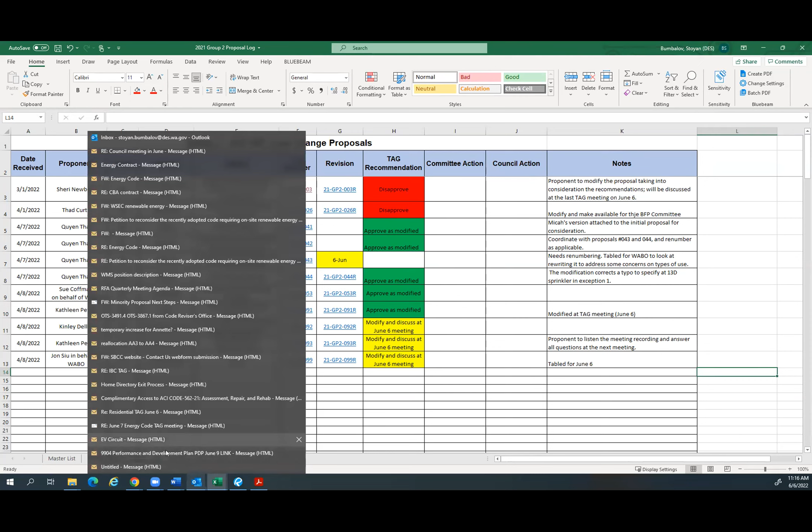Number 43. Okay. And Micah, that was the one that you sent me this morning, right? Yes, actually it was one minute before 10. Well, you know, it's still this morning. Sorry, Stoyan, that's correct, yeah.

Okay, I need to, was it a Word document or? Yes. No, I think it was that one. Oh, it was a PDF. Is that 43? Hold on, I gotta open 43 to see what it is. No, that is not it. No, nope, this is what you sent me. I think I sent you another one though. That one is for 40. Which one? Oh my gosh, I'm losing my mind. Okay, too many emails, Stoyan. Right here, 43, found it. Okay.

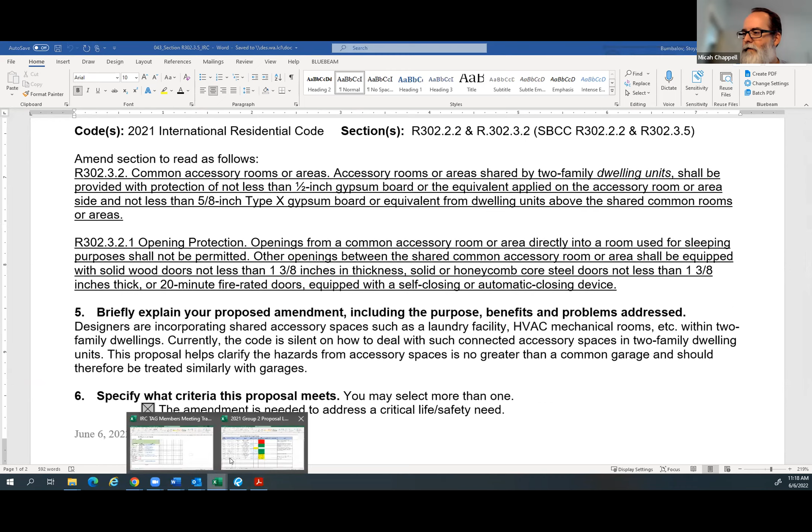All right, I'm not sure if Quyen is on today, and so for 43, the recommendation was needs renumbering, tabled for WABO to look at rewriting it to address some concerns on types of use.

Okay, and I can show the original one. That'd be great. All right, here is the original one, and I'll try to show them both. I hope I'll succeed, but okay, there's changes.

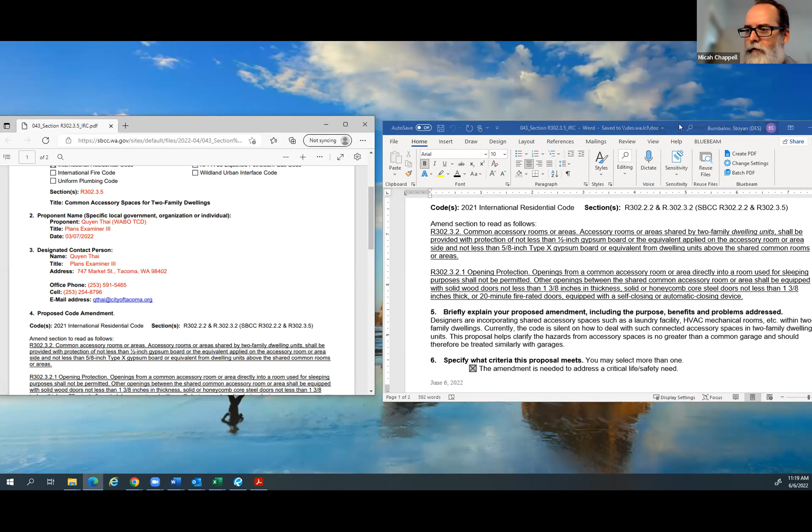Can you see that? Yes. I'm not sure I sent you the correct one, Stoyan. Actually, I did. They look the same though. Yeah, they look the same. Let's table this one, Stoyan, and I gotta verify what I sent, at least till closer to the end of the meeting. I will find out what I did or did not send you. I apologize, I gotta check with what Quyen had. So with that, sorry, folks.

So now we're going on number 92. Okay, great, Kinley.

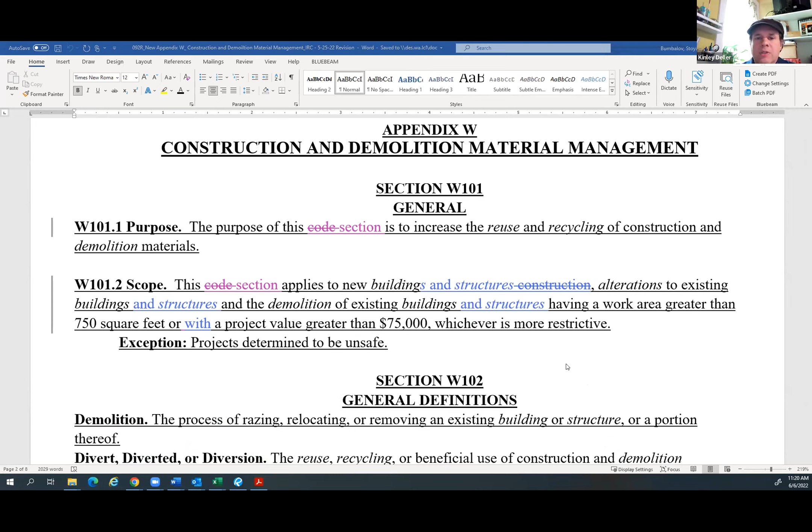Thank you. So based on the discussion and recommendations that were made at the last TAG meeting, we went through and made some revisions. First was to change references to code to references to section. Next, under the scope, we had building construction, and the recommendation was to change that to buildings and structures, so we did that and made the language compatible there. The work area, we added the word 'with,' so now it says 'having a work area greater than 750 square feet or with a project value greater than $75,000.' That's more of a grammatical change.

You can keep scrolling down. Then under salvage assessment, there was some discussion primarily over the term affidavit, and we talked about changing that. Looking at it more and working with Kathleen, we were thinking it made sense to just remove it from this part in the definitions. Then on the forms, we just added a line for the owner or owner's representative to sign. We didn't figure that it needed explicit explanation here.

Then under waste diversion report, there were questions about having certificate of occupancy. Some jurisdictions go more with a final inspection, and the recommendation had been to add that it be allowed to just be at approval of final inspection. So we added that language also. Go ahead and scroll down.

This is all I have. That's it. Okay. Any questions?

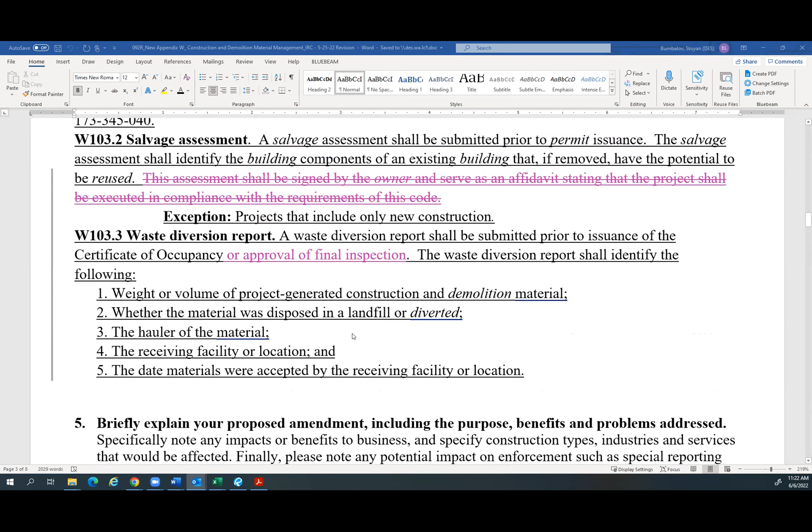This is in the rationale, I think. And I will use the opportunity here: some of these proposals are modified by the technical advisory group or by the proponent, and I will do my best to track the changes. But if the proponents can send me an updated version of the rationale, because sometimes it changes the regulatory effect. It's not specific to this proposal, but I forgot to mention it before. Okay, we can send you the new copy of the rationale. For this particular one, here is the change only at the rationale, nothing else.

Okay, any discussion on this proposal as we're processing it? Kinley, are the forms that you've attached to the end of this proposal something that you're expecting to see, or can a jurisdiction modify them as they feel necessary should they decide to adopt this appendix?

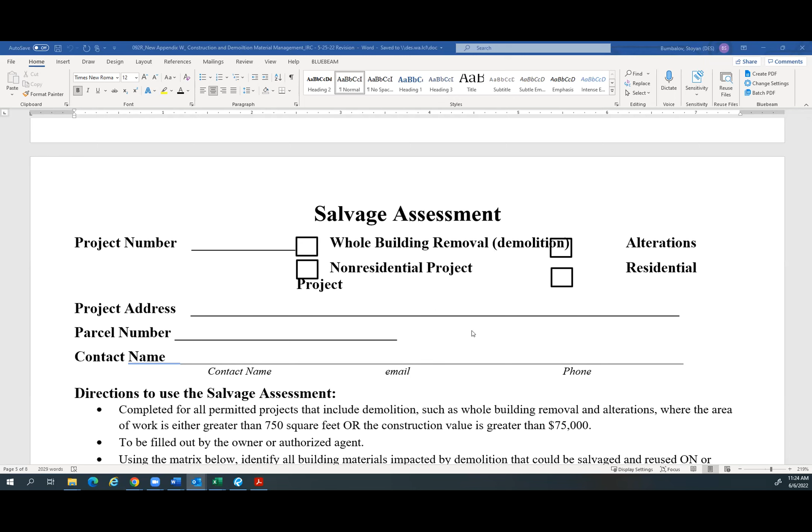I think that's a question for the TAC. Since they are included in the proposal, my understanding is they would be included in the code. The jurisdictions wouldn't be able to make modifications to it, but I may be incorrect in that. The forms, I'm sorry, I misled you a little bit or a lot. The forms are attached to the proposal, and yes, you can see where we added the signature lines.

And then I can just suggest that change real quickly. The permitting jurisdiction, we didn't think that needed to be in there because each individual jurisdiction is going to be the one handling the form. The permit number is there above already. And then the square footage of the structure will be addressed in the proposal section. This is the waste management report or waste material diversion report, so it's not necessary here.

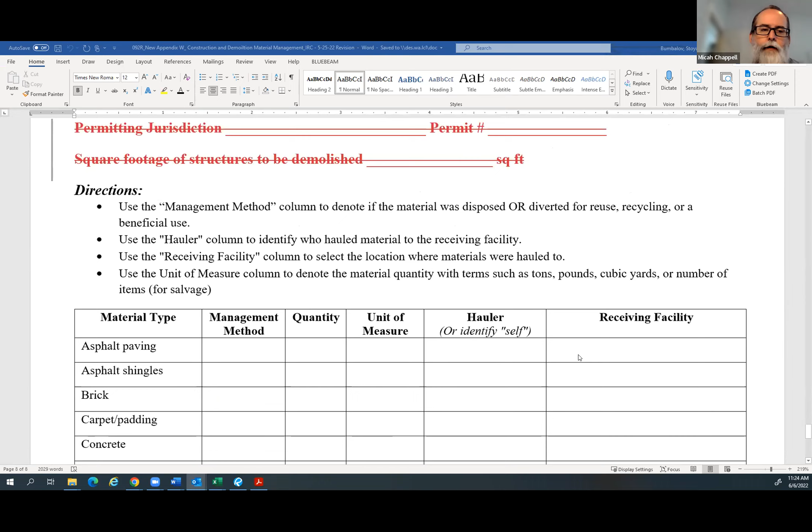Another signature line, good question. So those are included in the appendix, should we approve this? If they're included as part of the proposal, then it should be approved as a whole, the proposal and the forms. Okay, thank you, Stoyan. Alright, Heather, you have your hand up.

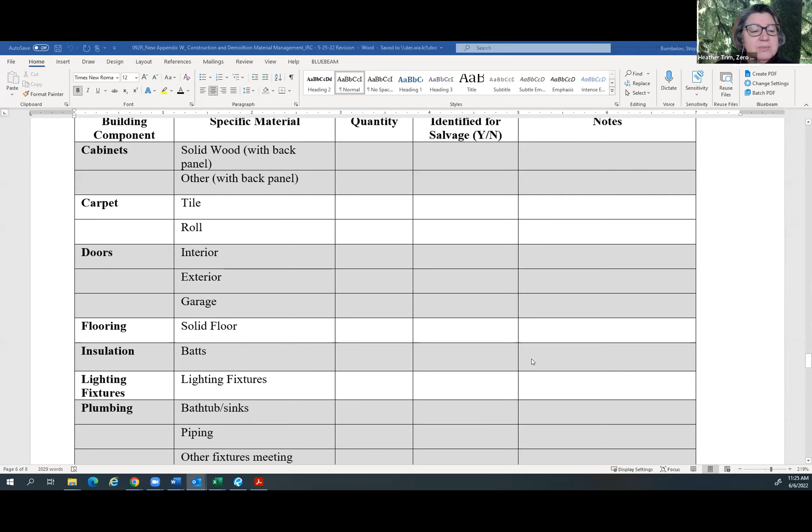Yeah, hi everybody, Heather Trim with Zero Waste Washington. This is my first meeting, so I wasn't quite sure the procedure, and I'm sorry I've missed previous ones on this topic. We are very, very much in support of this proposal, and I really don't have any dramatic comments, except that on the form, I couldn't tell if it said the word 'other' at the very bottom, because there are going to be oddball things that could be there, way down under miscellaneous. Maybe the word 'other', because there could be oddball things. That's a very minor comment. Anyway, overall, super supportive and hope you'll vote yes.

Alright, thank you Heather. I think that could be a good addition. How about you, Kinley? Yep, if we can add that now, that'd be great.

Okay, I'll open the floor for discussion from anyone else. Aaron, you have your hand up? Hey there, I too am kind of jumping in late and haven't been to the other meeting, so I really appreciate all the hard work you guys have done on this. Forgive me if this is already common knowledge, and Kinley probably already knows what I'm about to ask. But as far as salvage assessment, salvage verifiers rather, is there going to be a similar process as they have in Seattle with salvage verification? I think the nice thing they did with that is have the salvage verifiers get emailed when their company name is used. Could you tell me, Kinley, how similar is it going to be to the Seattle one, just for my information?

Thank you. Yeah, the Seattle one has been set up kind of as a demonstration. The system that Seattle is using is not going to be required. It's kind of going to be up to each jurisdiction to figure out how they want to work that. That said, I have been working with Build Reuse, the National Building Material Reuse Association, to develop a salvage verifier training. It's going to be primarily web-based, so that will be something to make it easier for jurisdictions to adopt, something that would add support to this. But it's not necessary for this code as it is.

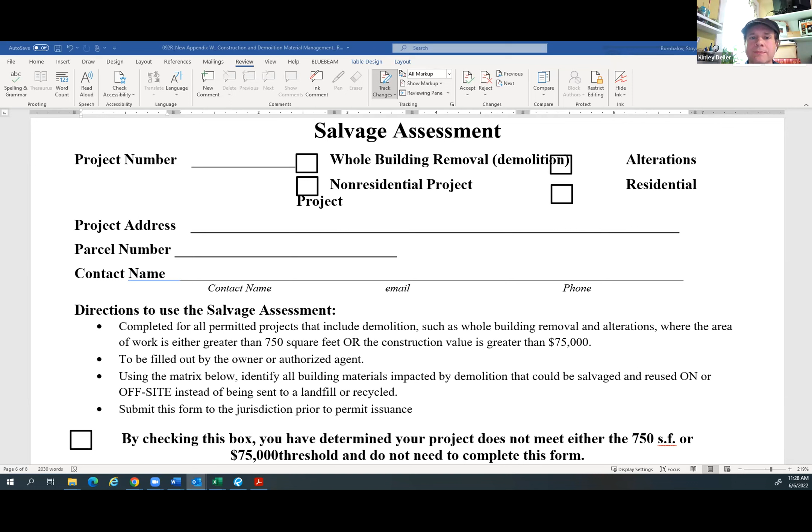Thank you, Kinley. All right, any additional discussions on this proposal? I had one slight change to the revision that we just made on the form. I think maybe it'd be best if the 'other' were moved to the next column over to the left, so that whoever's filling out the form could write what the other is in that column. Minor change. Okay, thank you. Is it the right place you asked for? Yeah, perfect, thank you.

All right, thank you very much. And Stoyan, could you give us a little brief informational, just for the TAC, before we vote on whether to approve or disapprove this, on where or how the appendix would function for the state and individual jurisdictions? That way they get a refresher.

Well, it depends what is the approach, what the TAC will recommend, because as far as I see this, is it an appendix? Well, there are two options: an appendix that will be adopted by the council and then it will be mandatory for all jurisdictions, or an appendix that will be added to the residential code, but it will be adopted only if adopted by a local ordinance. I'm not sure what is the intent, so I'm sorry if I'm not answering your question, but—

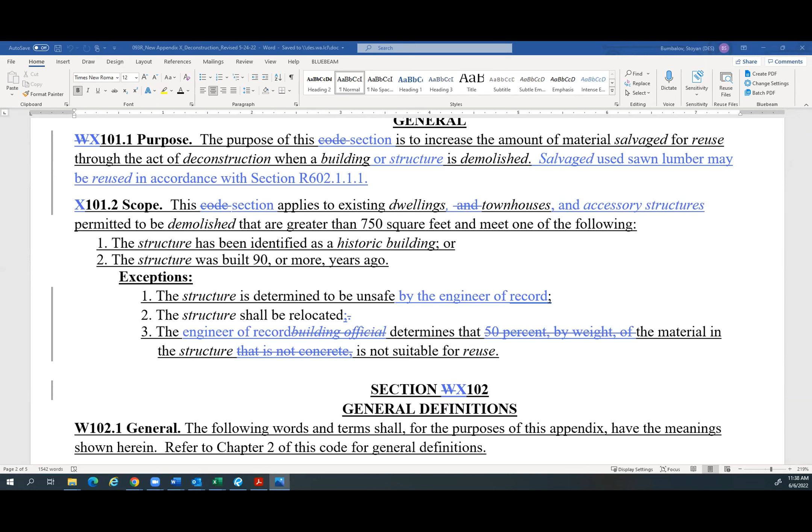Thank you, Kathleen. All right, I'll open the floor for discussion. Go ahead John, just one minor technical wording - would suggest replacing 'may' with, let's see, 'is permitted to be reused', just for consistency in language. Thank you John, I agree with that. Stoyan, do you know where that change needs to occur? Do you see it? Can you say again? I got distracted. In the second line at the very end, there's the word may. Second line of 101.1. Oh, 101.1. Okay, sorry, yep, right here - replace it with 'is permitted to'.

Okay, thank you Jon, thank you Stoyan. Any additional discussion or thoughts on this? Go ahead Ron. I'm having a brain burp here, but does this one also have the affidavit form in it? It does not, this one doesn't technically require the forms. However, they can and could be used in conjunction if both appendices are adopted. So the forms would document what of these materials were recycled, salvaged, and or sent to a landfill once the building's deconstructed. Thank you.

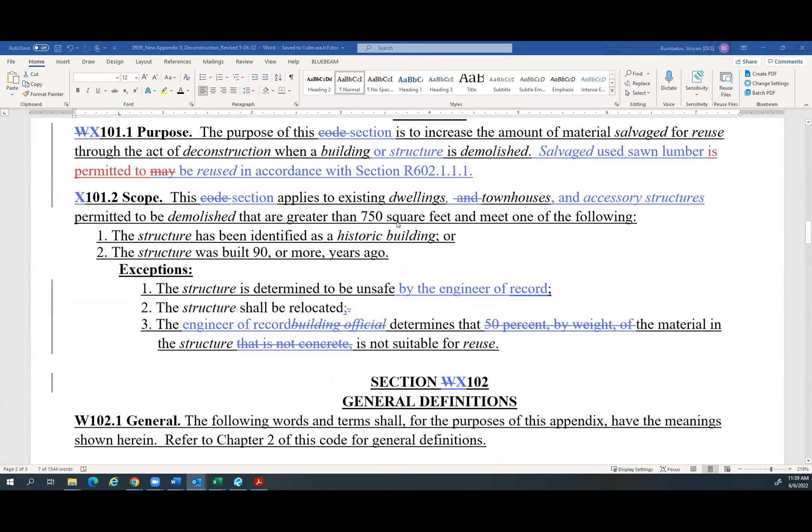Okay. In 101.1 purpose, second line, the new text - does the word 'used' actually need to be in there? Can you just say 'salvaged sawn lumber' rather than 'salvaged used sawn lumber'? Would it communicate the same thing? Yeah, thank you Annie, I'll have to go back and check. I believe the title of that section was used sawn lumber, which is why I put that in there, but I can confirm. I can confirm that.

Okay, thank you. I have a correlation question for Stoyan. If we approve both of these Appendix W items, they have different scope and purpose language. Will we just make this a different appendix number?

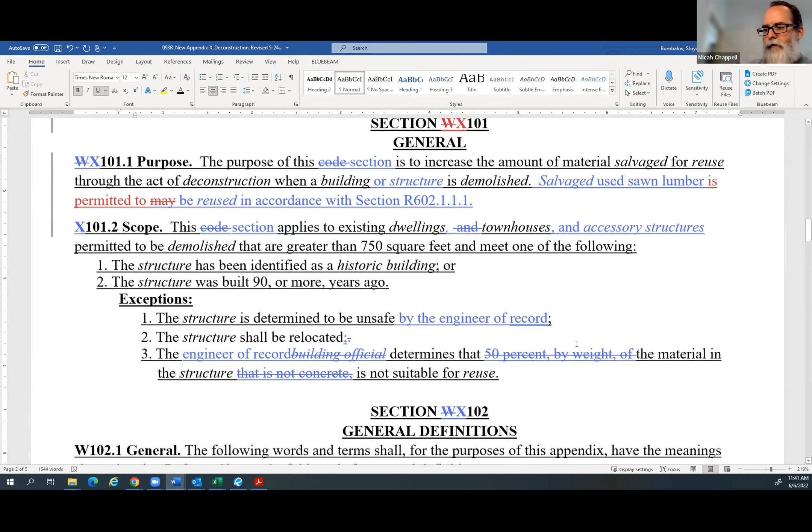Okay, thank you for that. Any additional items of concern through this proposal? And just to clarify, oh, go ahead. Oh, I was going to say overall, I like it. I'm just, I appreciated Annie's point.

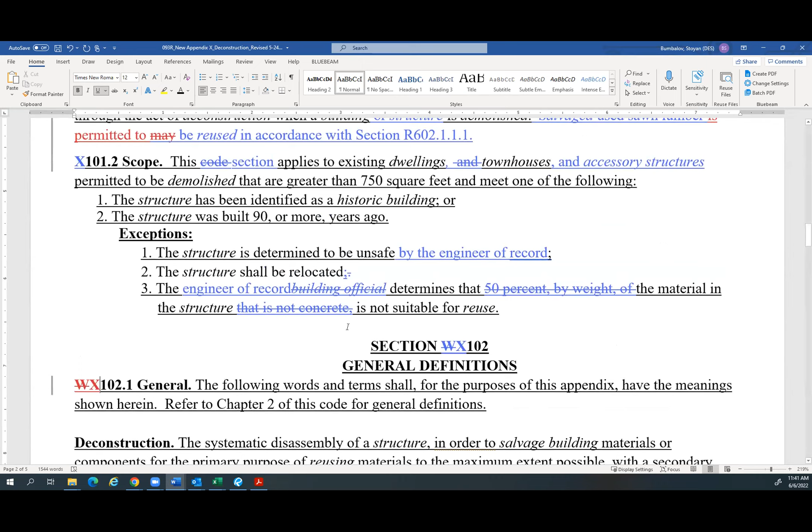So now I'm overthinking that, whole does that whole sentence even need to be there? Because this is about the demo. Do we really need to say that the materials that are going to be salvaged can be reused? Because isn't that the point of the salvage? And they may not have a building project as part of the demo. I just wonder if we can strike that whole sentence. But if it's helpful to have it here to just drive home a point and make it clear, I'm happy to leave it, as long as we, yeah, I think salvaged and used is redundant.

Yeah, you could remove the salvage term and just capitalize the U in used. That would replicate the title of 602.1. And agreed, Jen, it was just suggested language, whether or not it would merely be referencing, it would be a pointer. Just to clarify for people. Yeah. Yeah. Okay. Good point, thank you.

All right, I will entertain a motion on this Appendix X. That's what we're changing it to. I move to approve as amended. All right, thank you, Jen. Do we have a second? Second. All right, thank you, Todd. All right, we have a motion to approve as modified.

Any additional discussion from TAG members? Hearing none, if there's any opposition to this motion, please say nay. Nay. Thank you, Annie. All right, with that we have one in opposition. Motion still carries.

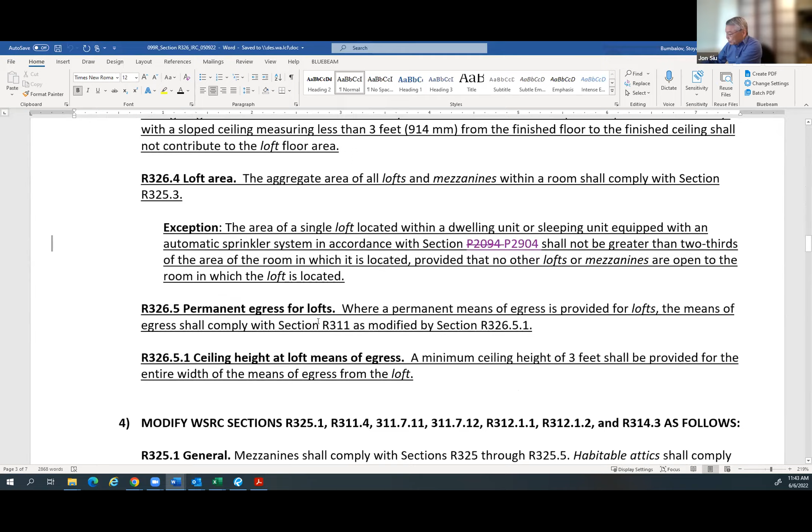Hello, thank you. So this revision makes two editorial fixes, corrects a couple errors, and makes one substantive change. The first error we needed to fix was actually in R326.4, the loft area. We had a typo on the section, should be P2904, so we fixed that.

The next change was in R325.1. We referred to group R occupancies, and that was because that's a cut and paste error, that was from our IBC proposal, and since there are no occupancies in the IRC, that's not necessary. But the substantive change is down in R314.3.

So I could continue to scroll down, please. There you go, thank you. So originally, well, the current language in the IRC Washington State version talks about you put a smoke alarm in sleeping lofts. Based on discussions at the national level, we are proposing now to say it's got to be somewhere near the loft. And there were a couple comments we made about that.

The highlighted part in number 2 is because our original proposal actually changed the language in number 2 to say it was going to the immediate vicinity of sleeping lofts and bedrooms. We got some comments that might allow the smoke alarm to be outside the bedroom if the sleeping loft were located inside a bedroom. So that was definitely not our intent. So we've created a new item 6. Essentially, what it says is that the smoke alarm for the loft needs to be within the same room, within the room that the loft opens into.

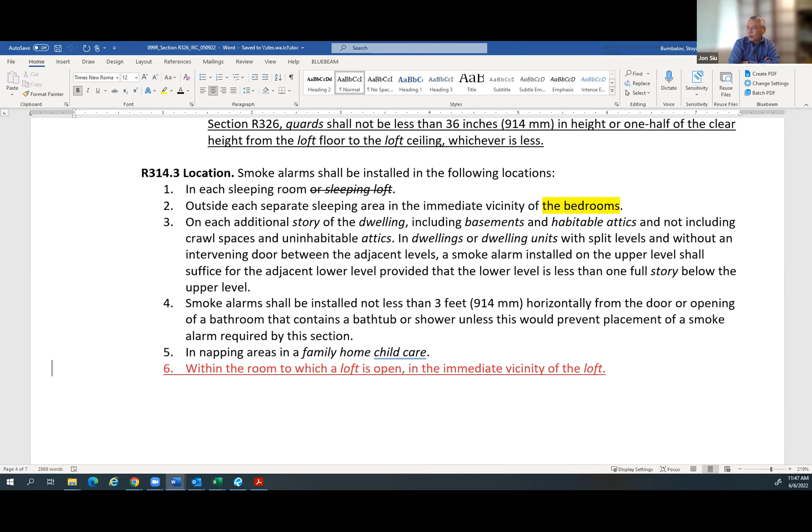So those are the changes that we are proposing in this particular revision, and I did highlight down below in the reason statement the reasons for these changes. Yeah, keep on scrolling down. I did what you asked, I anticipated your request, Stoyan, and have provided the revised reason statement there. Which I really appreciate. Yeah. So that's the extent of the change, and I hope the TAG will support this.

Excellent, thank you Jon. All right. Any questions or comments from the public on the proposal or the changes? We can scroll up to some of the changes if you'd like, Stoyan, or if folks want to read the reason statement, that's fine as well. So I'll open the floor to discussion for anyone.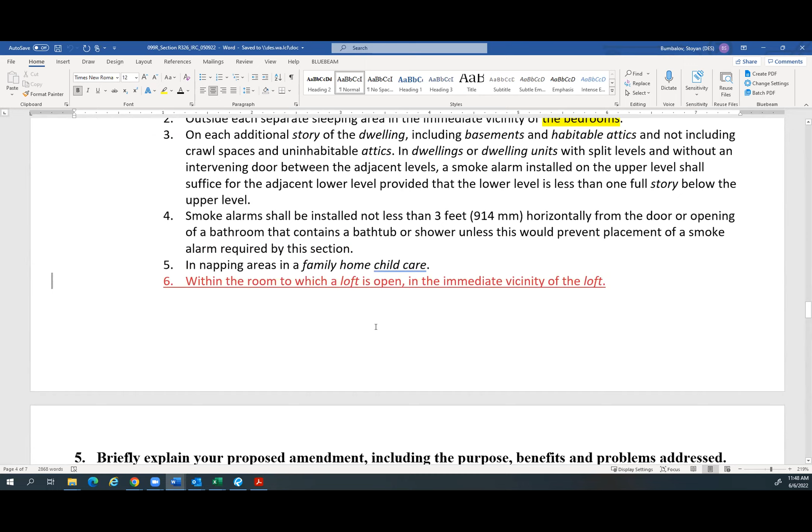Micah, this is Todd. I know we went over this and we kind of focused in on the smoke alarm change, but what's driving this in the first place?

What's driving this is that we are seeing these being proposed already all over the place, and it's allowed in the tiny home provision. Sleeping lofts were a code change we made last cycle, so it's already in the IRC. This expansion is making a lot of what we're doing here consistent with what we proposed for the IBC. The IBC already has very similar provisions. We've made some tweaks because of the national code hearings, so they won't be an exact alignment, but the concepts are all the same. The major pieces are all there. I think some of the language is going to be slightly different between the two.

So a lot of what we're doing here is aligning the IRC with what's already allowed in the IBC. The idea is that what we're getting are small units, like in Seattle, and they want to use the space they have. They have high ceiling above a bathroom, say, and they'll put a floor structure on top of the bathroom, then a loft up there for people to use. It provides a little extra space. As part of our IRC proposal for the national code, we got pictures from a jurisdiction in the east part of the state showing one of these inside a single family dwelling, and some of the things they built were not according to what we would have had here. So what we're trying to do is provide uniform regulations across the state to make sure these things are safe.

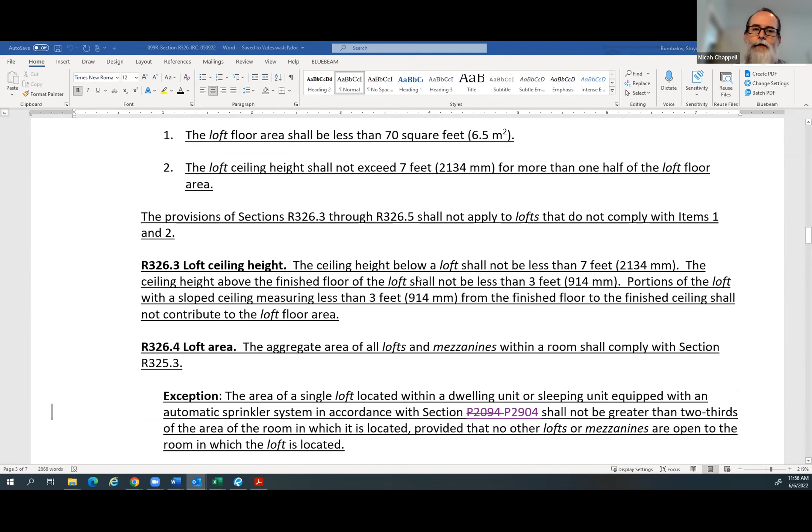Correct. Stoyan, can you scroll up to the beginning of the proposal as well? As I mentioned, this is not a sleeping loft, this is just classified as a loft. And I agree with John, it's an interpretation issue - if this is designated as a sleeping area on your plans, then you would have to treat it as such.

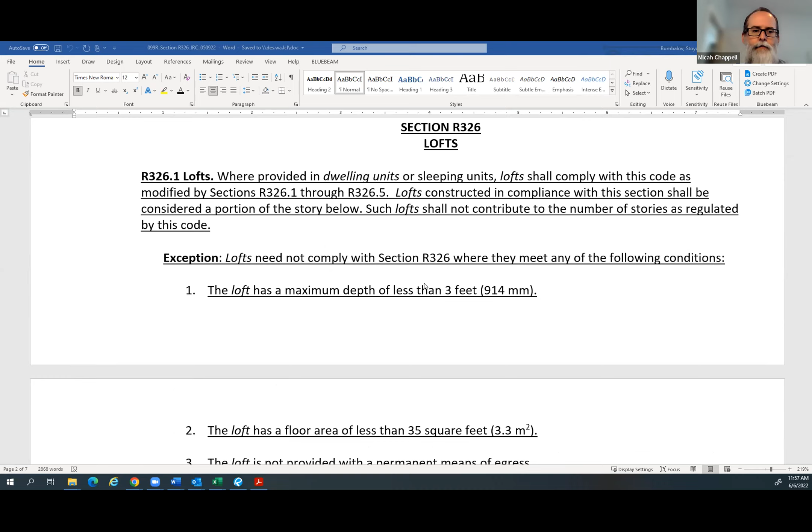Where do you want me to go here? Yep, right there, that's perfect - just showing the definition of what this is, a loft. Scroll up to the definition if you would please, that probably would remind people. There you go.

Again, it's just a mini mezzanine, and if it's used for an office, that's some of the argument we got from home builders at the national level - well, what if it's not a sleeping area, why do I have to do all this extra stuff? So we're trying to walk that fine line here. To me, this is just a mini mezzanine. Mezzanines don't always require EEROs, so if I have a storage loft or an office in this area, why should I have to put an EERO in there? That's the question that comes up.

And lofts, by the way, are not new to the code. The loft by itself, at least in the national code, is an undefined term, and so we're helping in this process to actually define what it is and differentiate it somewhat from mezzanines. It's a subset of mezzanines in my mind - other people want to keep it separate. But again, not every mezzanine has to do all these things, and for these small lofts we're putting in extra things that might not be required for some other mezzanines.

If you'd like, I could share my screen. Okay if you can, I won't be able to edit as quickly as you will though. Okay, let's - I found it, I think. Okay, if we need to edit. And then if you can make that bigger, that'd be great.

All right, so it did change. It was previously titled 'common accessory rooms or areas.' Now it's titled 'shared accessory rooms or areas.' And then the wording of 302.3.2 has changed significantly, and it just talks about separation by the table, which the table is now included below, which was not before.

And then it points you for information on the openings, sends you to the appropriate section of the IRC, which is section 702.3.5. Then it moves into the next section and talks about the opening protection and gives some information there. It did modify some additional language we had in there and specified what we need for the opening protection. And then, of course, as I indicated, it provides the table.

Go ahead, John, you're going to help me out on this, I hope. Not on the table, not on the substance - I do have a comment on the renumbering. Okay, go ahead. Okay, I see this did not get adjusted as we had suggested.

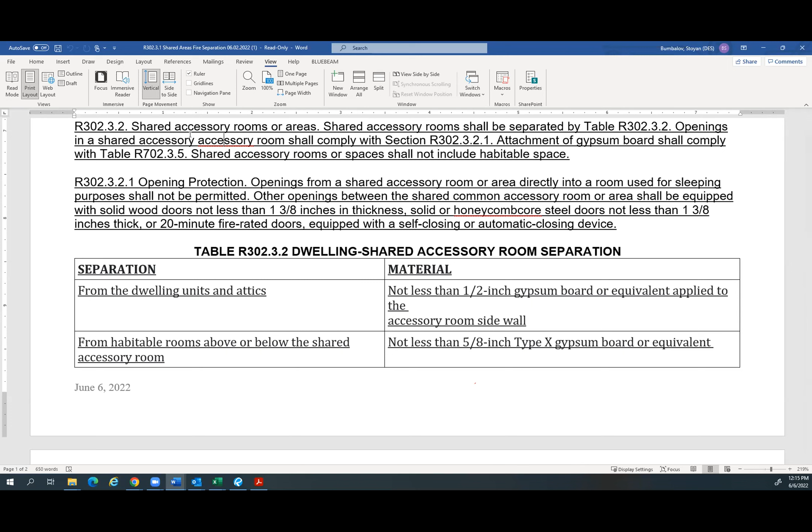The tag raised the question last time about the numbering because there's existing 302.3.2 in the state code. The numbering should be R302.3.3 and R302.3.3.1 for those two sections. Adjust the table number accordingly. And the existing R302.3.3 should be renumbered to 3.4.

So I can run over that - that's the very quick summary, and I can run it through you more slowly again. So the first section should be R302.3.3. Just change the last 2 to 3. Yep, and keep the R3 at the beginning. Yep.

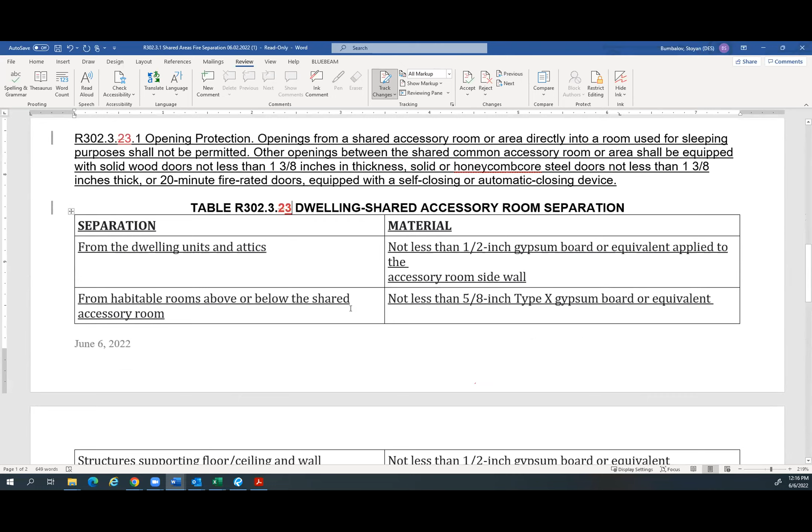And then the next section number, the 2 again should change to 3. The table number can also get renumbered to 3.3, 302.3.3. And the assumption is that the next section - there's only one following section, it's not in here, but that would get renumbered, which is R302.3.3 - it would become R302.3.4. That's supporting construction.

Thank you, John. Just to go back up to the first section, Stoyan, if you would, once you're complete there - we also need to change the reference numbers to the table, change that from a 2 to a 3 at the end, and then the one above that as well. Perfect, thank you, John, on the renumbering. I did not get that from Quyen, and he is out currently on vacation.

All right, so again, this was a proposal clarifying the shared accessory spaces and how those could or should be separated, and provide some consistent guidance in the code for those. And I'll open the floor for discussion.

Stoyan, can you scroll up so we can actually see the content? Okay. So this looks like it's going to somewhat of a 1 hour separation between the dwelling unit and the shared accessory rooms. Is that correct?

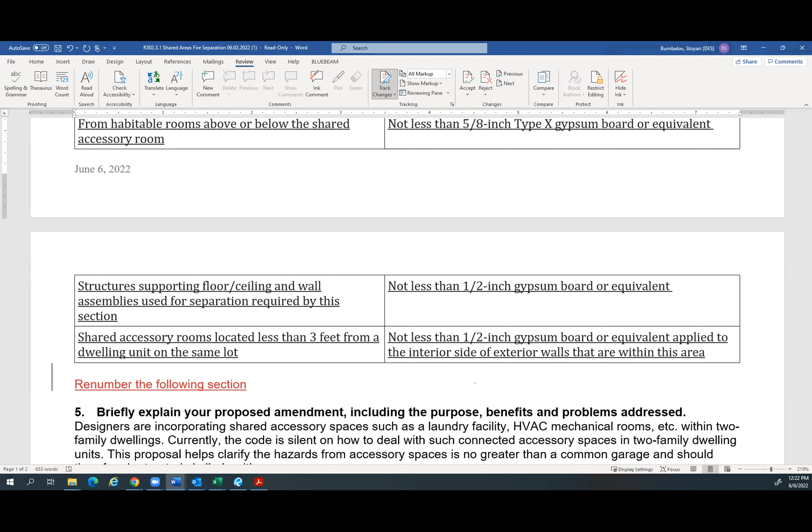Sorry, oh, where's my table? Why am I not finding my table? And I apologize, I'm looking up another table and looking at the separation requirements. But I'm not finding it. I'm not fast enough. What are the current separation requirements between the units?

You're talking about... This is only applicable to a duplex, right? A 2-family unit. So you could just mirror the separation requirements for between the two units. That would also give jurisdictions that have adopted sprinklers a reduction.

Sure, but we've talked about that same thing where now if you have a common space and you're providing the same separation as you do between the two units, you're actually doubling that separation between the units if you're only separating the common area. And I'd have to draw that out to kind of show you.

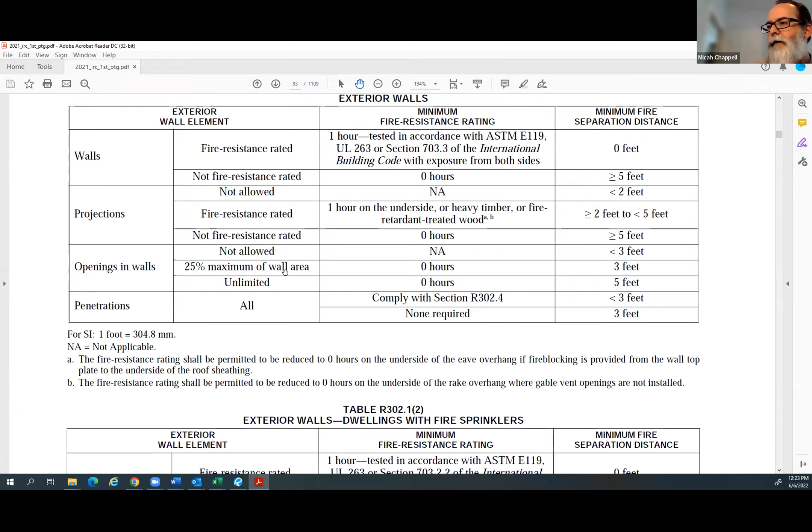And John, do we have some of those in our meeting agenda from when we discussed this proposal? Some of the drawings we did? Do you know? Did I lose John? John left.

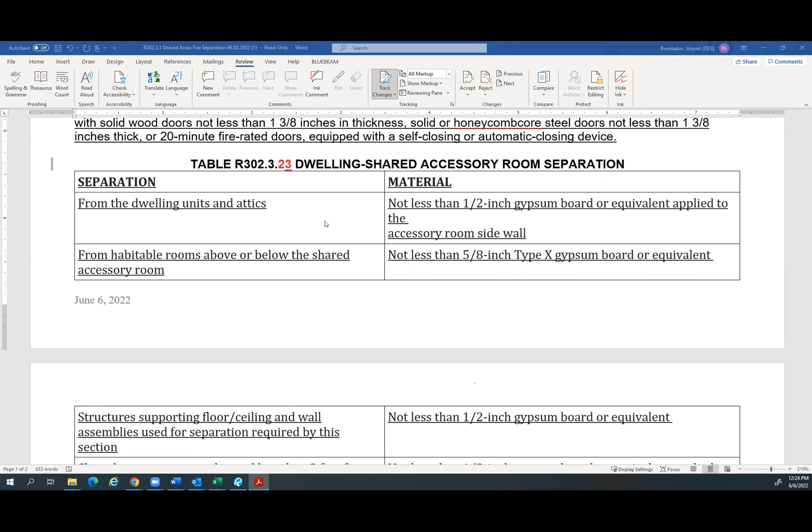Well, wouldn't that make sense to do that though? Because you still have that risk of these other people on this other side of this wall. And you also have the increased risk of nobody always being in that space, kind of out of sight, out of mind. People go in, put their laundry and leave. There's a fire from the dryer. Nobody's really aware of it because it's not part of their dwelling, or it takes longer for them to become aware.

Okay, so I'm gonna hold a little drawing up, see if it picks it up. Not at all. That sucks. All right, we kind of discussed this, and I apologize, I don't have that answer.

You're indicating, if you've got the separation between the two units of the one hour, and you have, so now you're having a one hour that's part of the common area on each side. So technically you'd have two one-hour walls separating the common area from each dwelling unit, if that makes any sense. I wish I had more to explain to you. I'm not sure I'm explaining this concept very well for folks. But right now, the question is, what is your separation requirement for your common area between your two dwelling units currently?

And I'm hearing that there's none. Yeah, I've never reviewed a project that had that, but I think I understand what you're saying. It's not that you have the separation on both sides of the accessory room. It's that it's like a double wall. Right. Yeah, so that was the question.

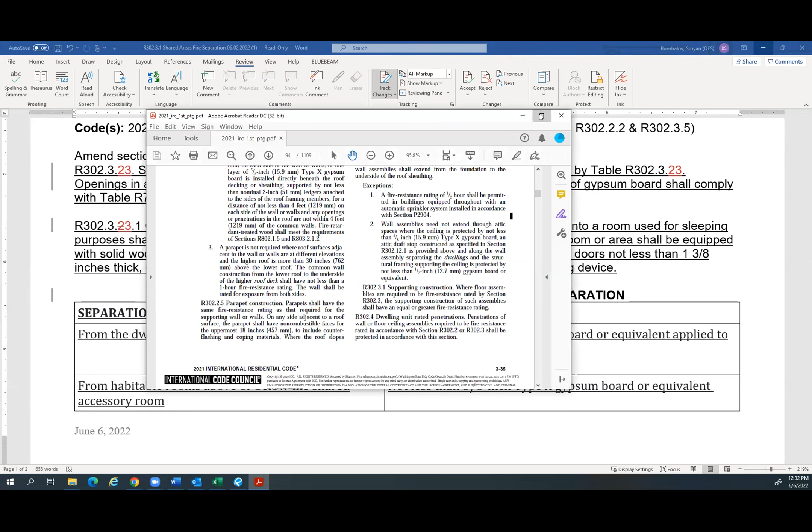I know John recommended changing the numbering, but I'm looking at the 2021 residential code. I will move it here, I want to be sure I'm doing it right. So currently we have R302.3.1, and the initial proposal was to go with R302.3.2 and 302.3.3. So now when we are moving to, as it was suggested, 302.3.3, I don't see it.

So Micah, can you, or John, I think how it was originally proposed, it matched the numbering in the 2021 IRC. So I got a little bit confused why we needed to change the section numbers. I'll have to go back and review it.

It's all right, Stoyan. It was voted okay for disapproval, and we will move back to look at it and bring it back for BFP anyway. Okay, so with that, thanks Stoyan, thanks everyone for your time. I just want to verify if there's any other business. Stoyan, can you let us know the next steps, please?

Well, the next steps, we will have the BFP committee most likely next Wednesday. Unfortunately, I cannot schedule it right now because not all tags are done. So I will wait for the IBC tag this Wednesday before I decide to schedule the BFP committee for next Wednesday.